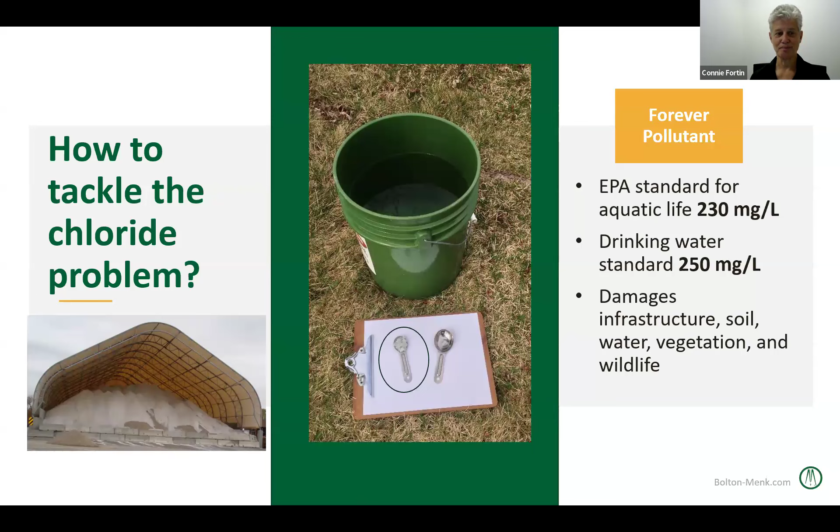If you have questions about the chloride pollution problem, we're well versed to answer that, but I'm going to assume you know about it. My background for 20, 25 years is I trained thousands of winter maintenance professionals, a lot of them in DuPage County, Lake County, Will County, Kane County, in your area. And as I trained these 20,000 or so winter maintenance professionals, they trained me.

They would often come to me after a class or during a class and complain about the way an intersection was designed, a parking lot, a ramp, stairs, bridge, you name it. They're like, it's not all our fault.

So two years ago, my company was acquired by Bolton and Menk, a civil engineering firm. And I realized I had the perfect opportunity to share all the stories I had learned from the winter maintenance professionals with the people that design all these salted surfaces.

And although I spent most of my career in the middle of this triangle, trying to drive down salt through more efficient winter maintenance, I realized we have a really big opportunity to reduce the need for salt right from the top. Because we don't apply salt because it's fun. We do it because our pavements aren't performing.

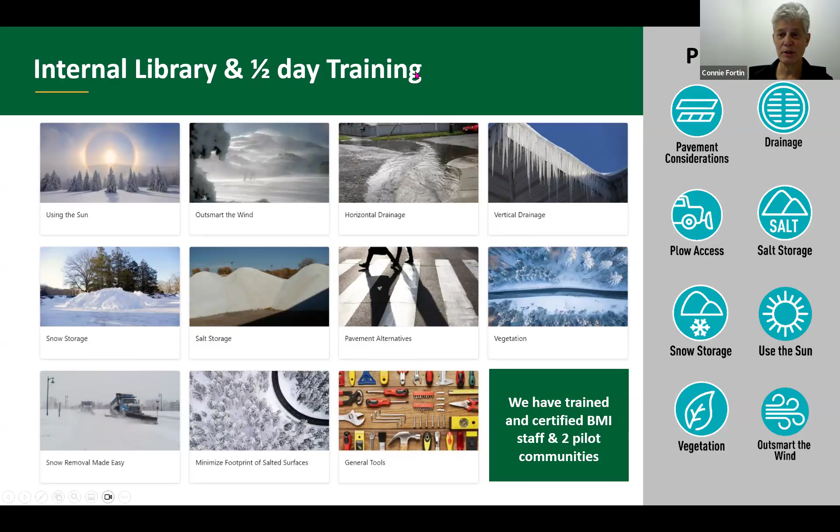In addition to creating an internal library with all sorts of things in there, I created a half-day training, similar to many of the training programs I've created for Minnesota or that I've taught in Illinois. We've brought most of our civil engineers, landscape architects, planners, and technicians through it internally, and we're starting to bring this out to some pilot communities.

So what are these things we're telling our engineers to think about? Winter. Here's an example. One of the things I want them to do is use the sun. It's free, nature is out there, let's put it to our advantage. In this easy graphic, you can see wherever we have a shaded surface in the winter, it doesn't perform as well. It's more icy, slippery, dangerous, requires more maintenance and more salt. So in something as easy as selecting the species of tree or the placement of tree, we can get much better pavement performance.

But yeah, if we think we need a real complicated solution, maybe we don't.

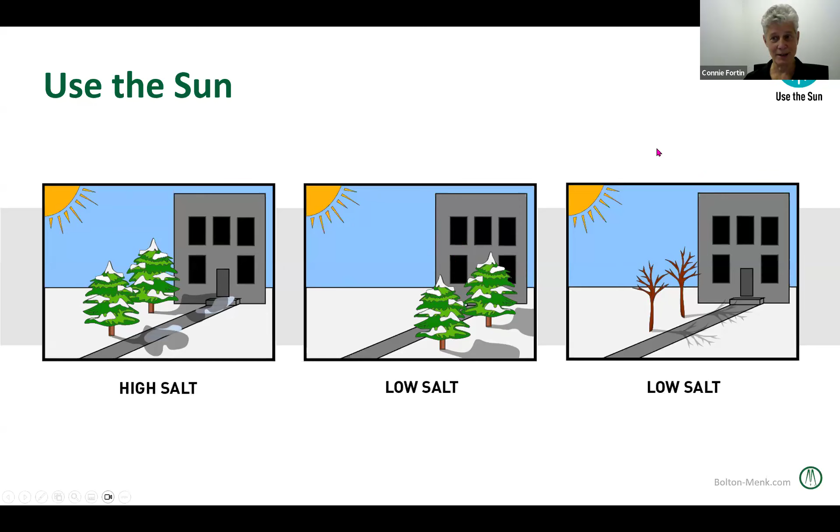That's pretty easy. We also ask them to outsmart the wind. In order to outsmart the wind, you first have to know the direction of the winter wind. This graphic shows you that it looks pretty consistent throughout your state, although there are some local, regional variations. So we put that in the CAD design platform now, the angle of the average winter wind in the community, so they can see it.

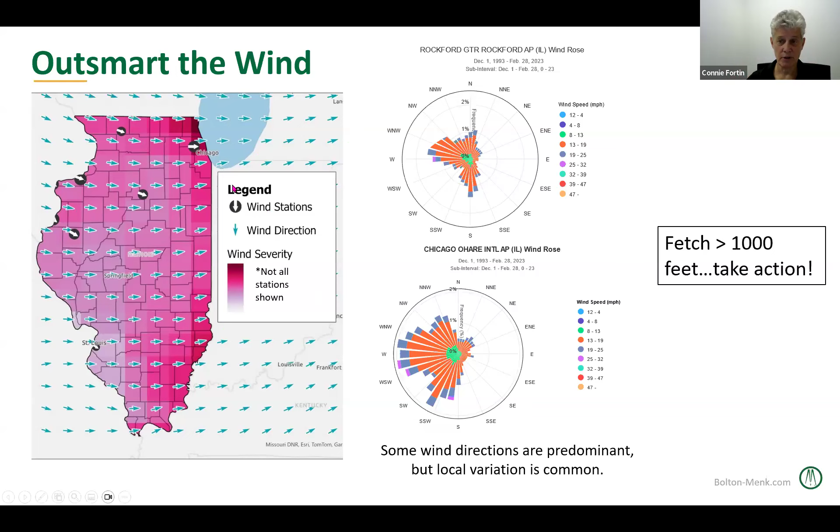That if you understand the different forces of nature, you can do something about it. Here's a couple things you can do about outsmarting the wind. Snow fence, that's pretty common. There's living snow fence, structural snow fence, there's even solar snow fences these days. The whole way a snow fence works is the wind hits the snow fence, that wind loses its energy, it can't hold the snow and it drops it on the other side, before it gets to our road or parking lot.

Now, what we sometimes forget is the wind doesn't know if it's an intentional snow fence or an accidental snow fence. So we put our bushes, our rose garden, our park bench on the windward side of our salted surface. And the wind hits it, it loses energy and it deposits the snow right on the sidewalk or right on our front steps.

So these unintentional snow fences, we can sometimes do something quite easy about. We can move the shrubs to the other side of the parking lot or the sidewalk or the park bench, or we can even just trim down the rose bushes before winter. So some basic things we can do to outsmart the wind.

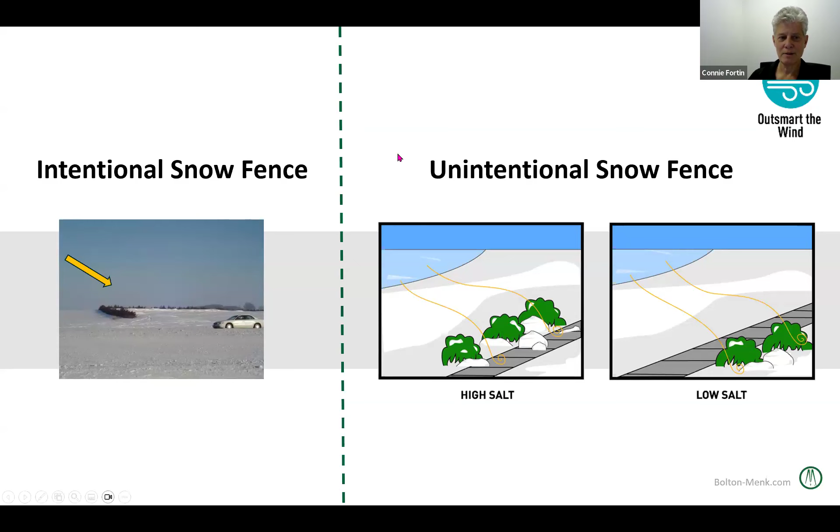This is, I think, the thing I like the best, if I could pick one of the things, and that is our meltwater sprawl. So our engineers design for rain. That was shocking to me when I realized that they don't design for snow. There's no requirements to design for snow. So the plow drivers have to clear the sidewalk, the parking lot, and the road. That's their job. In my opinion, the engineer's job is to not let it come back on those saltable surfaces. This is not acceptable to me, this picture, because this is going to create an ice rink overnight.

And we can engineer that problem away. We want to reduce the meltwater footprint. Write that down on a big piece of paper, put it on your door.

Here's why. In the Twin Cities, we get about 46 freeze-thaw cycles. Now, some of them have no snow on the ground, so of course we have no meltwater problem. And some are real brief cycles, not long enough to melt and move the snow. But let's say we have 20 or 30 of these during the winter. They all create things that we show in this top picture. Those are safety risks. Those are call outs to maintenance. Those are salt. But we can design those away.

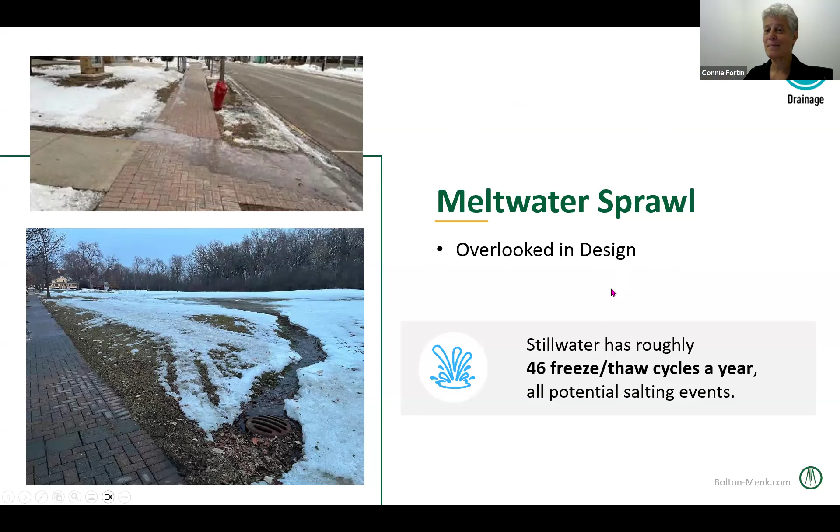Now, there are areas that are more prone to these problems than others. Super elevated surfaces are surfaces that are at a slant like this. The lower picture is a ramp. The snowy side is the uphill side. So you can see on this warm day, the snow melted and it moved across the ramp. You can also see a lot of salty residue. You can see tire tracks in the mud. The day I drove by, somebody had knocked over the signal light. It is very hard to keep this safe.

We can just see super elevated surfaces to be prone to meltwater sprawl and increased risk, winter risk, and salt.

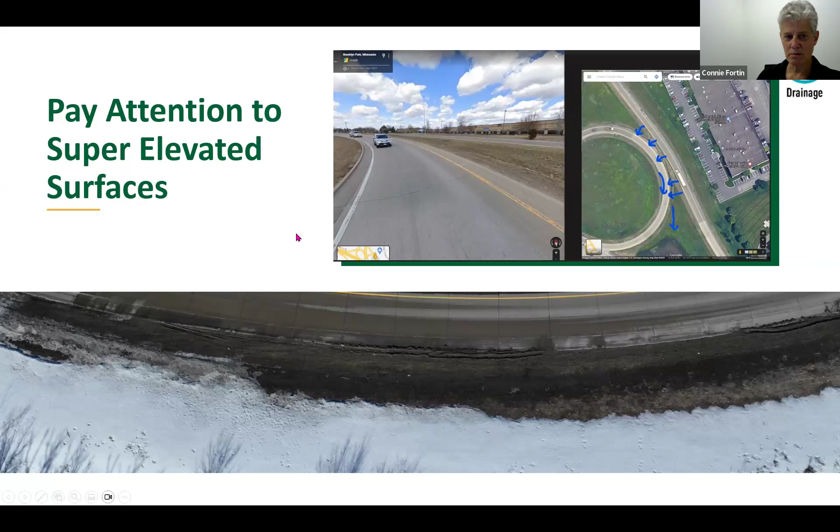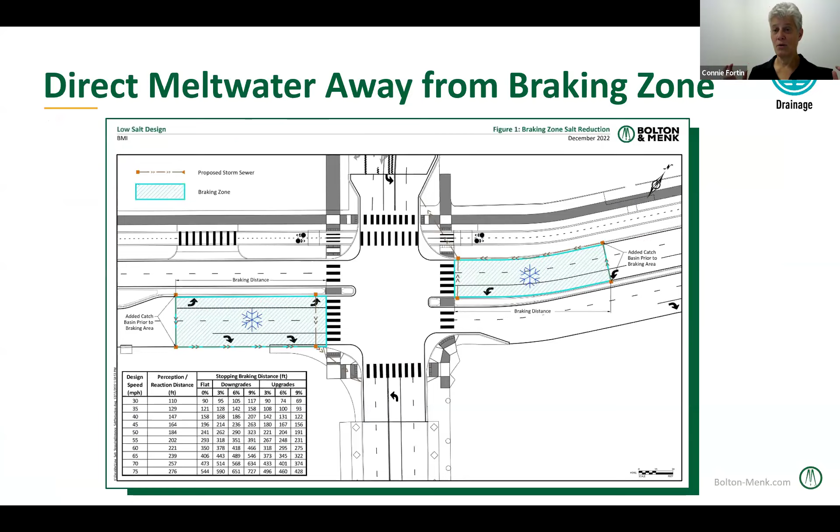We're also looking at braking zones as a critical area. We are not going to route our meltwater through the braking zone. So are you doing that in your plans? If so, you might want to consider it. The plow drivers know the safety risk areas, and that's what they salt the most. So braking zones is one of them. We don't want to route our meltwater through the braking zones.

Vertical drainage is something else. I better make sure I'm not talking too long here. Amy, keep me on track. I could talk forever on this.

So exciting. So what I mean by vertical drainage is this. The plow drivers plow the road, the parking lot, the steps, these things. But the snow lands on many other areas, on the roof, on the deck, on the awnings, on the lawn, raised median, parking lot islands. They never plow those. But the snow still melts. And when the snow melts from these surfaces, I do not want it to enter our saltable surface. So you have to pay attention to where the snow's landing and then control the meltwater. Do not let it go across the intersection or across the parking lot or across the sidewalk. That's a new way of thinking of things.

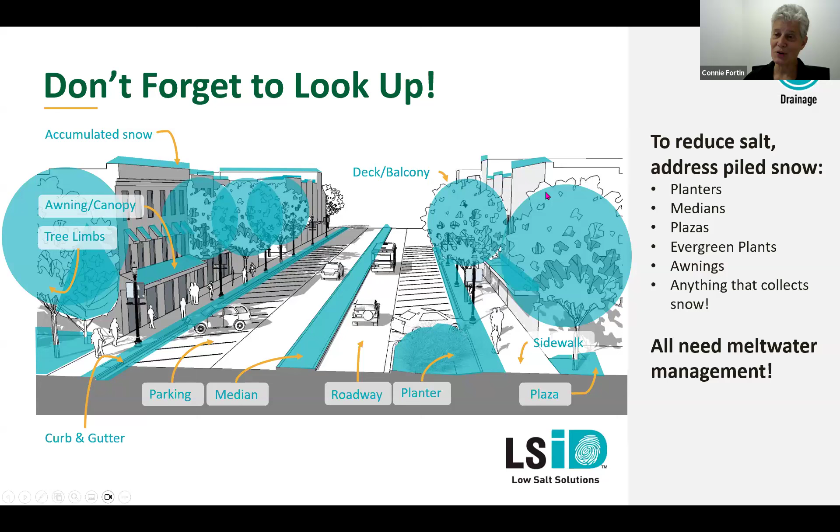So one of our engineers drew up this. All the stuff in blue is where the snow melts that we don't normally pay any attention to. But now in low salt design, we are paying attention to it, and it's creating a whole new way to look at our designs.

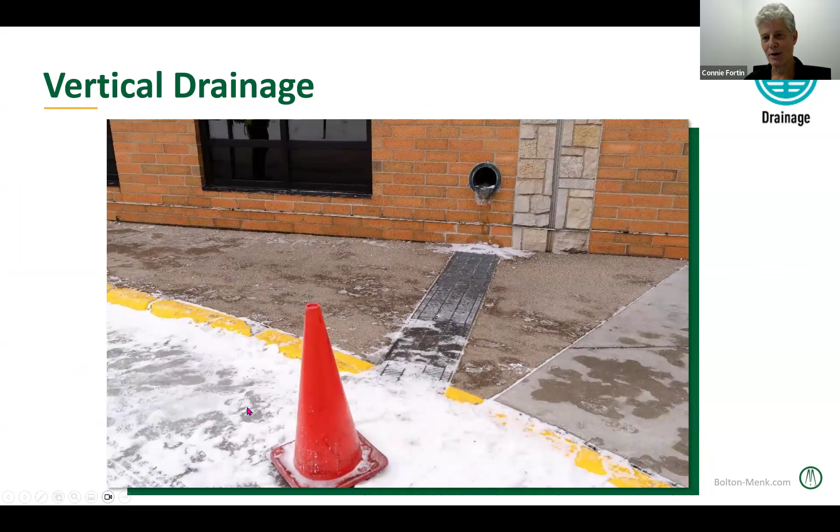This is another vertical drainage example. So the meltwater comes out, used to come out across the sidewalk. Apparently that was too dangerous, so they chiseled out their sidewalk, put in this kind of grate to make it safer on the sidewalk. But they just pushed the problem to the parking lot. So we're trying to fix a poor design, and it's always harder than designing it for winter to begin with.

How about if we made it easy to plow? If we make it easy for snow removal to be successful, they will do a better job. If we make an obstacle course for the plow drivers, they can't remove the snow. They'll do the best they can, but nobody's jumping out of the truck with their shovel to get all these weird nooks and crannies that we put in.

So look at your designs. Imagine if you were driving a plow truck. How are you going to clear the snow out of here? Do not make an obstacle course.

Same for your sidewalks. Don't put the mailbox and the light pole and the park bench and the planter box all spread out over the sidewalk. Group them so the UTV with the blade can plow around them. Just pretend you were in that vehicle. Anybody here who's plowed snow is probably going, yes, absolutely.

Now, parking lot islands. Do me a favor. The next day or so, go out and observe the parking lot islands around you. How many of them are green and beautiful like they were designed? They might have had thought about flowers and trees and all this great stuff.

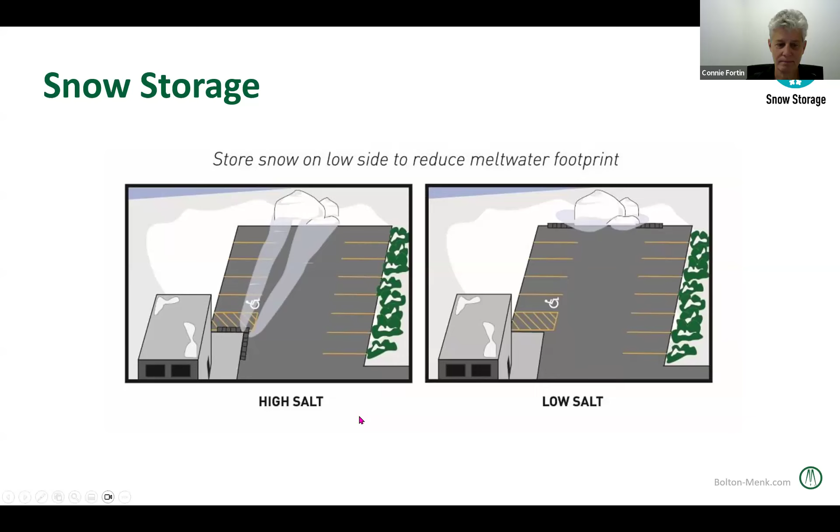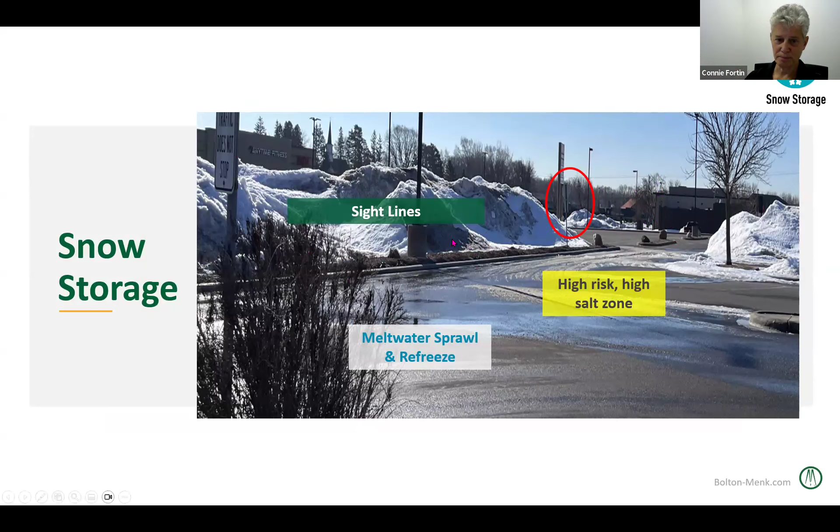We launched this initiative 2 years ago, and I've spoken at a lot of events, and I've been asked many times, do we have a manual? So I sat down over Christmas break and I wrote the low salt design primer, the ABCs of low salt design. It's going through internal technical review here. Then it will go through some kind of company standards formatting before it's released. So I'm optimistic by halfway through the year, this will be available.

I don't know if it'll be for sale or for free or how we're going to do it. But the other thing that I also wrote is the snow garden guide, because I'm sick of rain gardens and I'm sick of parking lot islands. We need to think about a 4-season solution, and our 3-season thinking causes all of these things that we design to be destroyed by our winter use. So what if we designed a snow garden instead of a rain garden? How would the design features look different, and how would it perform for us? So I'm hoping also that this will be out middle of the year. And that's been a lot of fun.

As we're testing our ideas, we have pilot cities now in the Twin Cities. We have 5 of them where we're bringing them through our training. We're looking at problem sites in the winter, their policy, their plan review checklist, their parking lot design standards, whatever they want to do, along with our new winter thoughts. Together we're learning a new path forward.

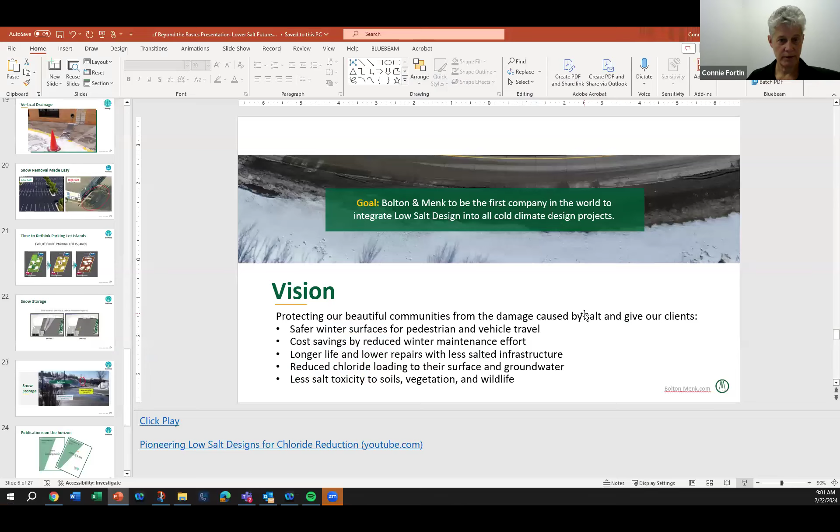This is a video. I don't want it to play. Shoot, I guess I'm gonna have to. This is a video on YouTube. I think it'll probably be in your chat, that if you want to watch us talk about an example of going through low salt design in a little movie, it's there for you. You can do that.

So with that, I'll turn it back to the audience and to our chat to ask me questions about low salt design, about use the sun, outsmart the wind, vertical drainage, horizontal drainage, snow storage, snow gardens. There's a lot of fun things that we can do to design for winter.

Thank you so much, Connie. I have to say, I'm a former architect, and a lot of what you just said really resonated with me. You plan to keep water off a building, and you want to make sure that the structure is designed to hold the snow weight. But where exactly it drains, these are really, really good points.

I know we have some interesting questions in the chat. David was wondering, you talked about the parking lots and the islands, but he was curious about chlorides and their accumulation in permeable pavements and permeable parking lots. And if they do accumulate within them, are they releasing chlorides over a longer period of time? And what are the management strategies for folks who are using permeable pavements in parking lots?

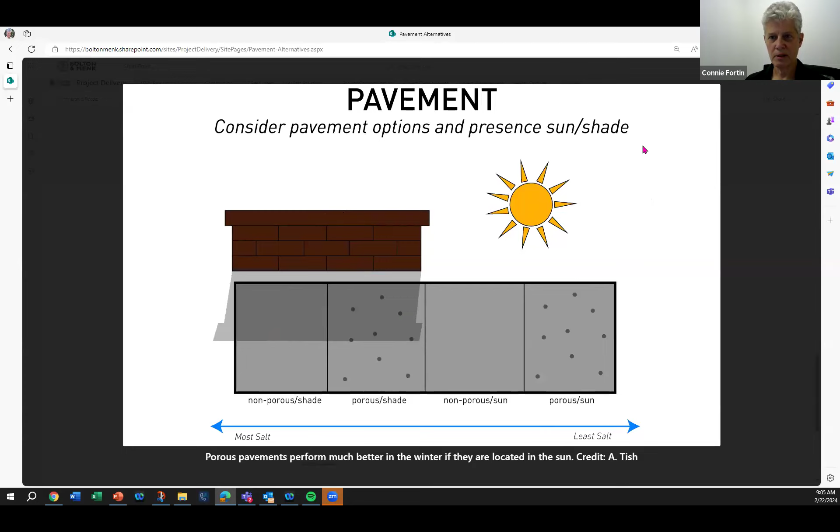Also, my opinion of pavement alternatives as far as design -- and I know design considers a lot of different things -- but I've worked with a lot of plow drivers and they're afraid of the alternative pavements, like what kind of cutting edge, could I salt it, should I salt it, what am I gonna do about it? And also the designers are afraid of it too. We don't really know, it's more work, it's a little mysterious.

So what I say in design, and you guys can prove me wrong, is let's use the real easy things: use the sun, outsmart the wind, control that meltwater sprawl. And if we get into a tough situation, like an ambulance bay on the north side of the building where the wind is blowing and it's shaded and the gutter is draining right down onto it, it's a really good time to use alternative pavement. Let's go look at those heated pavements. Maybe not for the whole 494 interstate, but when we've got a tough winter problem to solve, it's a really good time to use them. Then it's not so scary and it's really smart.

So that's kind of not answering our person's question, but it's just a little of my insight anyhow.

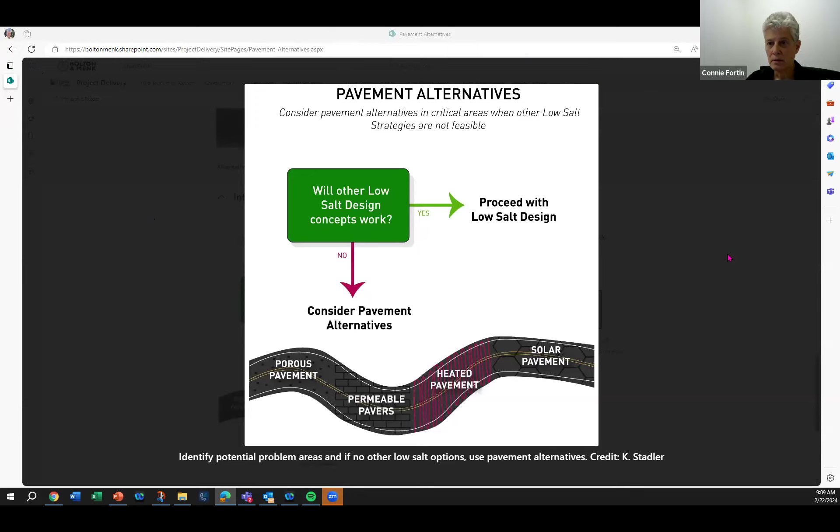So while you're working on that, our final question was talking about deciduous trees, and if you would recommend planting those on the south side of a parking lot so the sun can reach it in the winter, but then they can shade cars in the summer. So strategic siting of specific types of trees.

Yeah, so the deciduous trees are brilliant because we can reduce that heat island, right? But we don't have to have the winter penalty of that shade in the winter. So I think that's good. I know some people are going to say, well, we've got the leaf litter and the phosphorus loading and stuff, we've got to make sure we're not creating that problem too. And there isn't a perfect world.

But I do think that if we did the analysis of planting trees in islands, does that really work? Or how much shade and where should we plant them, and how do we create this ecosystem that can survive and allow winter performance? We're going to come up with some brand new looks at design. I think our cities are going to change what they've been traditionally doing.

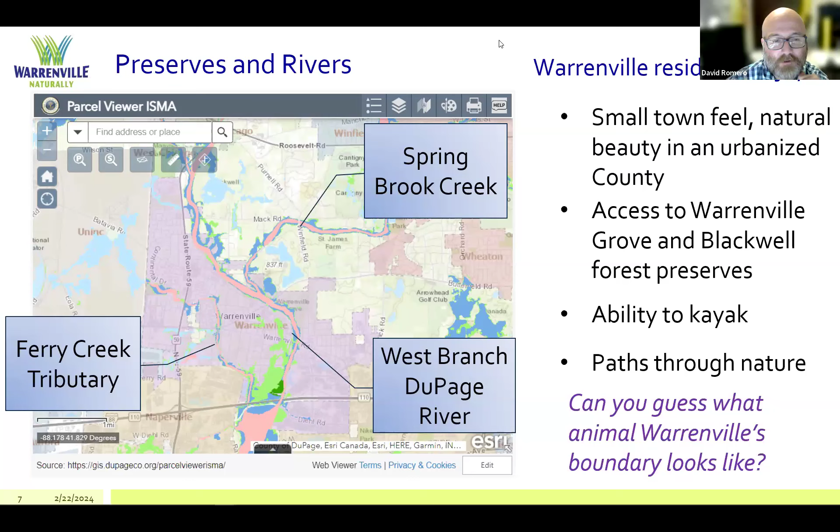One fun fact is I'm originally from Michigan, and for those familiar with Michiganders, a lot of times we use our hand as a form of explaining Michigan geography. So when I first started working at Warrenville, one of the things I looked at was trying to get a sense of the boundaries of Warrenville, and what it looked like to me. I felt like it looked like a particular animal—I don't know if it looks like that to you, but I felt like it looked like a miniature schnauzer. So maybe you have something now to refer to as Warrenville. Not that we're a miniature schnauzer, but it's something fun to consider.

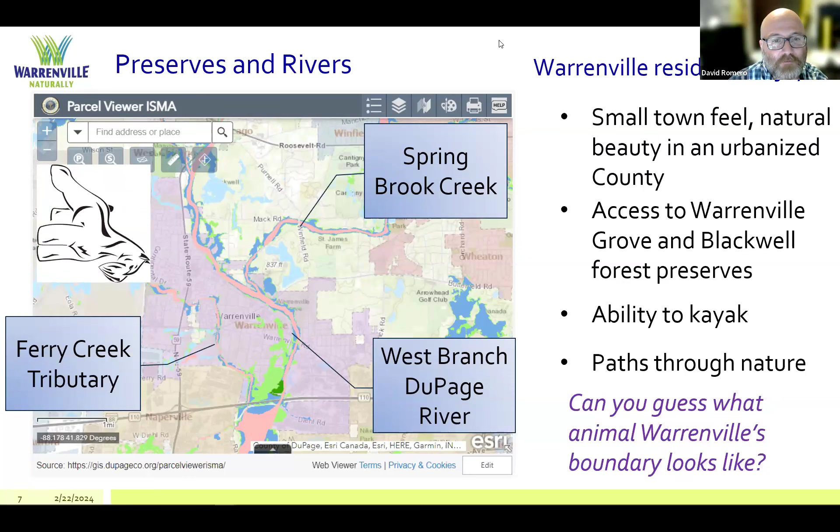Going back to our desire and care for a small town and our appreciation for natural beauty, we started a Natural Areas Commission around 1986. They helped oversee public areas. I heard from our former mayor, Vivian Lund, that there was actually a time where the city had its own greenhouse and grew and maintained trees. Apparently she also gave away free seedlings to people who gave birth in the city as a kind of welcome.

Shortly in around the early 2000s, I think 2007, the commission changed to the Environmental Advisory Commission. And with that, the roles and responsibilities were also a little better documented. So currently, one of the main things is to educate the public about environmental issues.

They also oversee our Arbor Day event. We have actually been a Tree City USA recipient since 1987 and have received that recognition annually since, with the exception of 2 years. So it's something that as a city we're proud of.

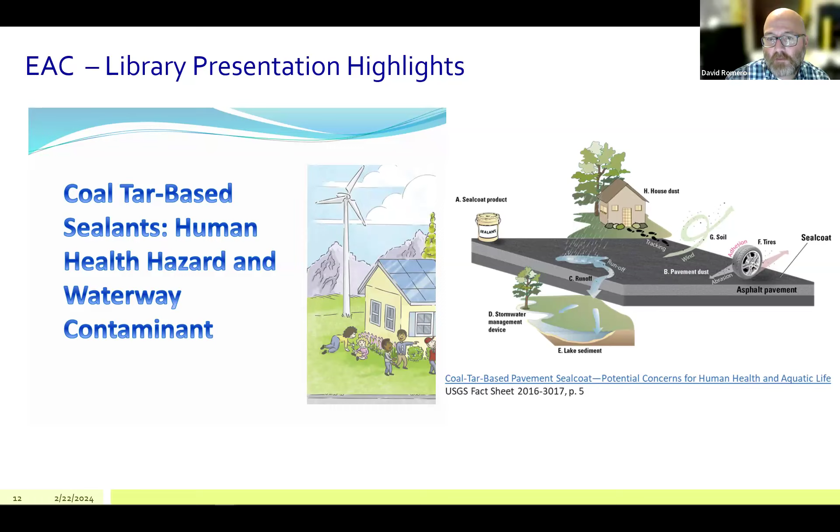It's a hazard that, as you can see in the picture on the right-hand side, starts off with the asphalt getting abraded by tire tracks. It creates dust, which can be carried by wind onto soils or tracked into our shoes and into our home. Rainwater can take it into our storm sewer system, and then it goes directly into our rivers and streams.

The byproduct of coal tar is PAHs, polycyclic aromatic hydrocarbons. They're formed by the incomplete burning of coal, oil, basically organic substances. Even grilling or charring your food produces some level. The main concern is the level of concentration of PAHs in coal tar, which is considerably higher than in asphalt.

The primary exposure levels are: you can inhale the dust, have skin contact, or ingestion. It also tends to have a higher effect on children, as they're more susceptible to its effects.

This, as I stated before, is not only hazardous to humans, but also to aquatic animals. It's really toxic. PAHs are pervasive, they're a sediment, and they don't dissolve.

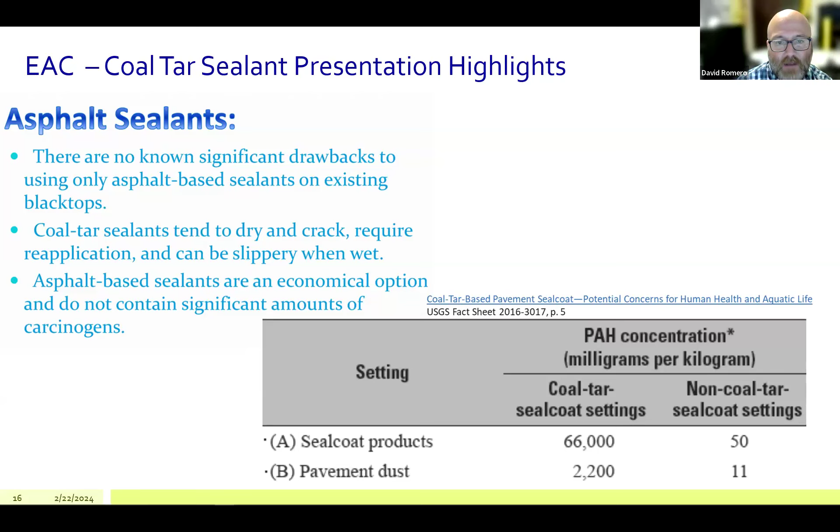There are alternatives out there, such as asphalt, some oils, acrylics. You don't have to go with asphalt as your type of pavement choice, but if you are sealing an asphalt parking lot or driveway, an asphalt emulsion is a better route than coal tar.

One question a lot of people have is, well, what's the cost difference? This is an example from Seal Master, a popular seal coat company out there. On the right-hand side you can see the price difference between coal tar and asphalt — asphalt now is actually cheaper.

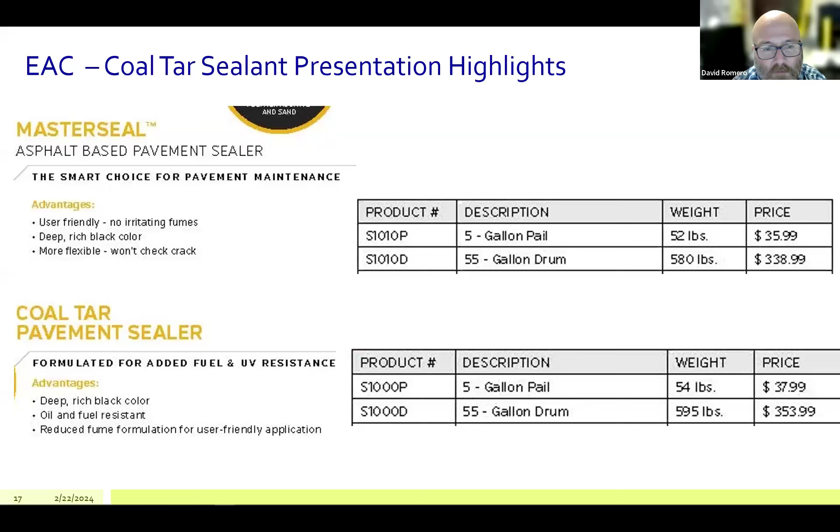It provides better flexibility and supposedly doesn't crack as much. Granted, there is the argument that coal tar might be a little better at oil and fuel resistance, but is it really the payoff for the hazard that it causes to both workers, children who might be playing on it, and the environment?

I place this on here as a reference for you. I imagine our presentation will be dispersed to you. If you want more supporting data, there's a ton of it done over the years by the USGS, Agency for Toxic Substances and Disease Registry, EPA, and other scientific journals. If you're looking for local advice, I wouldn't necessarily come to me — I'm a civil engineer and only have a beginner to intermediate level understanding of water and sediment quality — but you can reach out to staff at DuPage County or the DuPage River Salt Creek Work Group.

I imagine people at the Conservation Foundation might be able to help you too. And of course, you can come to us if you want to find out more about our process and how to implement a coal tar ban.

So at this point, I'm going to pass off the presentation to our other presenter, Christine Hocking.

Thanks, David. So as David was mentioning, the EAC had this library presentation in 2012, in May and April. So what really happened after that point? With that motivation from the library session, they made a presentation at the Cantera Owners Association.

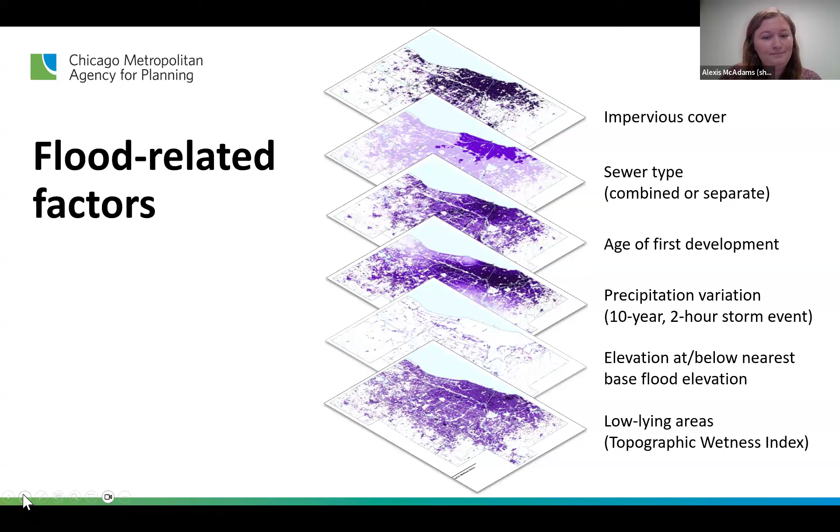Combining those ingredients, we decided to go with a method known as the frequency ratio approach. This method analyzes the relationship between those recorded flood events and each of the flood-related factors individually. Then once we can quantify and put a number in that relationship, we can combine them together to create a summarized index.

This is a really great method to use when we have partial data. By that, I mean we have a lot of data on where floods happen, but we know it's not complete. There are places that flood that aren't recorded or reported, or just don't make it into the data sets that we have access to.

However, this method still gives us a way to estimate flood susceptibility for those places, even though we don't have a fully complete set of data. This is also a pretty useful method for areas that we know are susceptible to flood, but we just haven't recorded floods recently in our time of study, though there is a possibility of flooding in the future.

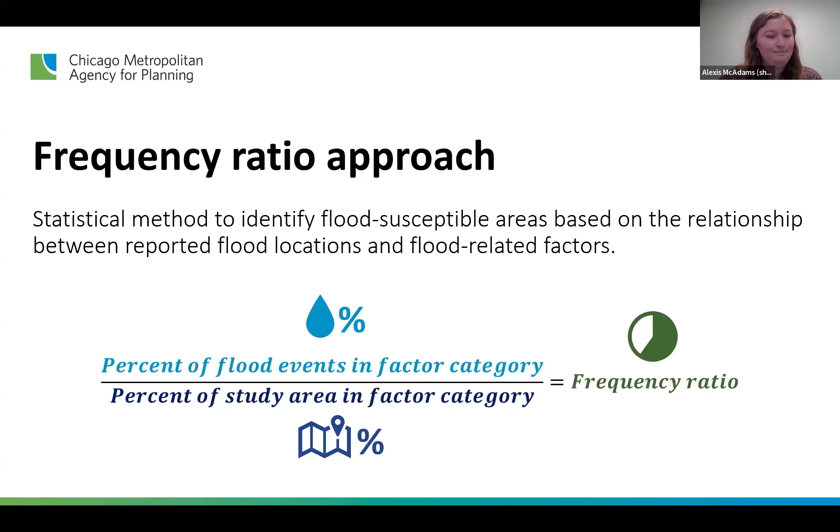So this approach is a little easier to understand with an example.

Across northeastern Illinois, about 15.8% of the region is covered by a combined sewer system. However, when we look at our flood locations data, we notice that about 27.4% of all flooding events are happening in these combined sewer areas. Since this is a higher percentage, combined sewer areas are seeing more than their fair share of flooding compared to the rest of the region.

So this is an example of producing a frequency ratio for just one of our flood factors. We repeat this process for all of the flood factor information we collect. Sometimes we divide those flood factors into categories or percentiles of equal size, and then we add up all the frequency ratios and normalize them on a 1 to 10 scale to produce our index.

So finally, we have some brief results of this analysis, and to summarize it extremely briefly, I don't want us to be here too long.

We saw the highest frequency ratios for areas with combined sewer service areas, areas where impervious coverage is between 35 to 70%, areas that tend to get more rain, very shocking I know, and areas that were developed prior to 1974, or estimated to be developed prior to 1974. Of course, areas that match all of these traits would see extremely high combined index scores.

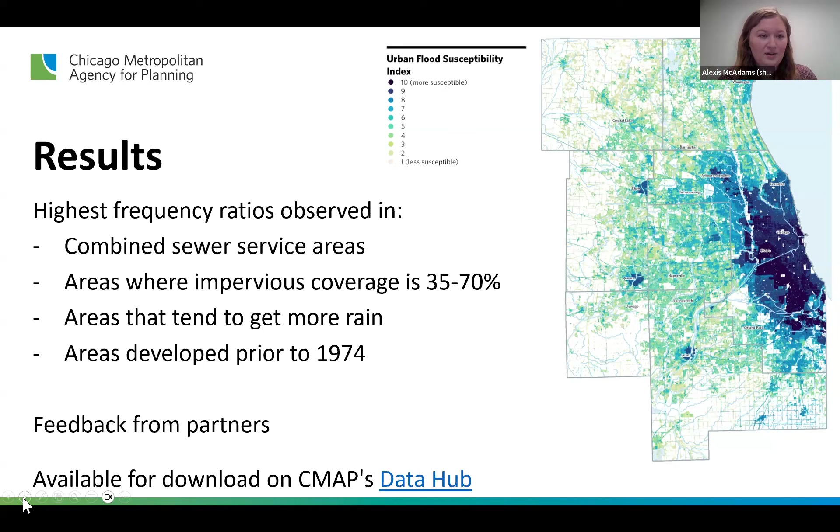The results are available now on CMAP's Data Hub for download and analysis if you'd like to check this out yourself. We also include a fuller methodology appendix document with more detail about the frequency ratios, the data we used, and the flooding events data. So if you're interested in more details, please check it out.

There are a few different ways that CMAP and our partners are using the index. It's used as a preliminary screening tool for hazard identification, such as in the Cook County Hazard Mitigation Plan, or HMP. Here at CMAP, we use it to help identify areas for stormwater planning assistance, and other agencies in our area are doing the same thing.

It's also been used to prioritize and select mitigation and resilience projects based on need, in combination with other data and analysis that CMAP produces.

Finally, we were excited to be able to share the assembled flood factor data for other researchers and analysts, and you can see that on our data hub. But unfortunately, we're unable to do the same with the flood event location data, due to privacy restrictions associated with this data, trying to protect identifiable information for properties that experience flooding.

So as I mentioned earlier, CMAP continues to hear about the value of this tool, which we're very excited about. We're currently undergoing an effort to update it. This update is supported by congressionally directed spending, also known as an earmark, that we received in September of 2022.

We're looking at improving this tool in 3 major areas. First is updating our input data, which includes adding additional flood location information, as well as looking at new flood-related factors beyond just those 6 we initially chose. Next, we're also reviewing our analysis method, the frequency ratio approach, and taking another look at the geographic extent of our indexes. Is separating the indexes into a riverine and an urban version still what we want to do going forward? Finally, we'll be improving access to the data by producing web-based mapping tools to make it easier for people to view, explore, and reanalyze the index for smaller local areas.

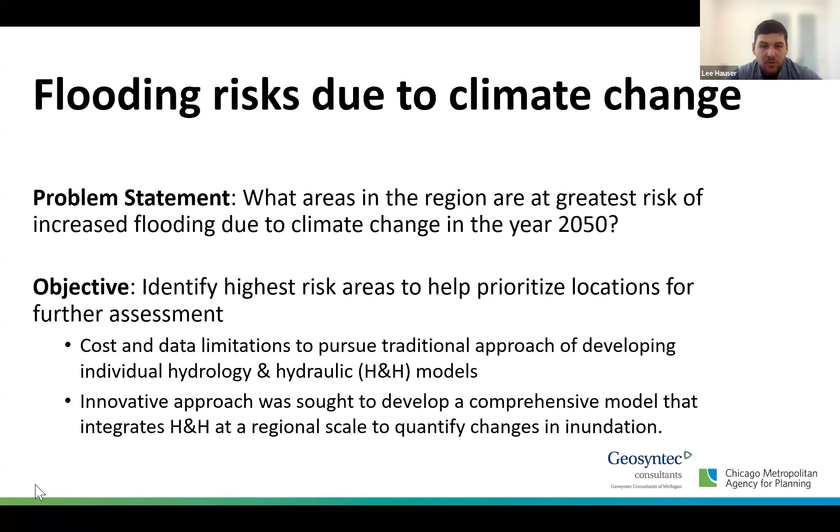We decided to use HEC-RAS 2D with the rain on grid analysis because it can integrate both hydrology and hydraulics into a single model. This approach uses high-resolution LiDAR topography to directly represent the underlying terrain to perform the hydraulic computations while accounting for spatial variability in the rainfall across the landscape.

As I mentioned earlier, it follows a lot of the technical effort CMAP did with the FSI, but applies a dynamic hydrology component. The rain on grid analysis provides a seamless transfer of precipitation to calculate runoff and perform the hydraulic computations to map the flood inundation.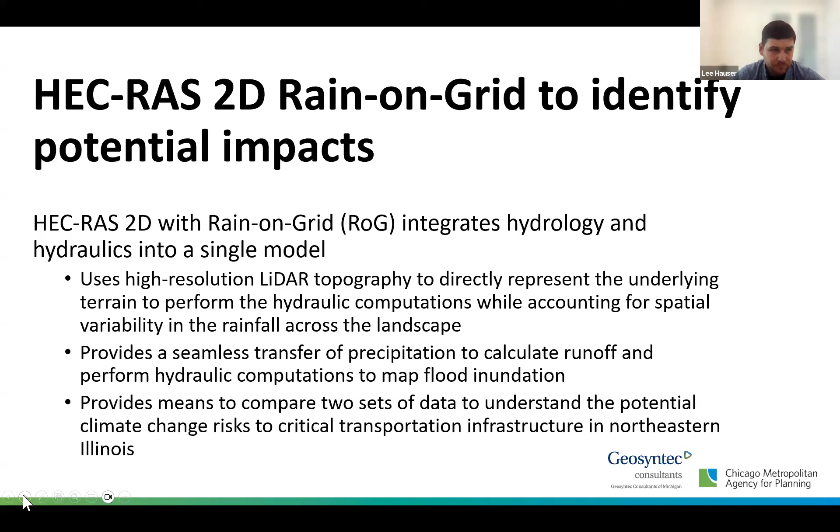Being able to do this in a single model provides a means to compare two data sets to understand the potential climate change risks to critical transportation infrastructure in northeastern Illinois and being able to compare those rainfall events.

As I mentioned earlier, the traditional approach for climate resiliency planning in the urban environment relies on both H&H models to estimate flooding impacts. There are multiple software programs that can look at this, but they can either be very costly or need extensive amounts of data inputs related to storm sewers.

HEC-RAS is a free program developed by the U.S. Army Corps and has always been the industry standard for modeling hydraulics within the riverine system. This focuses on using flow hydrographs to simulate flows through the riverine corridors.

The U.S. Army Corps has continued to release newer software versions of HEC-RAS that build on its modeling capabilities. A significant advancement came when it added capabilities for 2D modeling, and most recently, the ability for spatial infiltration capabilities for those 2D areas, which improved the model's capabilities for simulating runoff flows across the terrain when a precipitation hydrograph is applied.

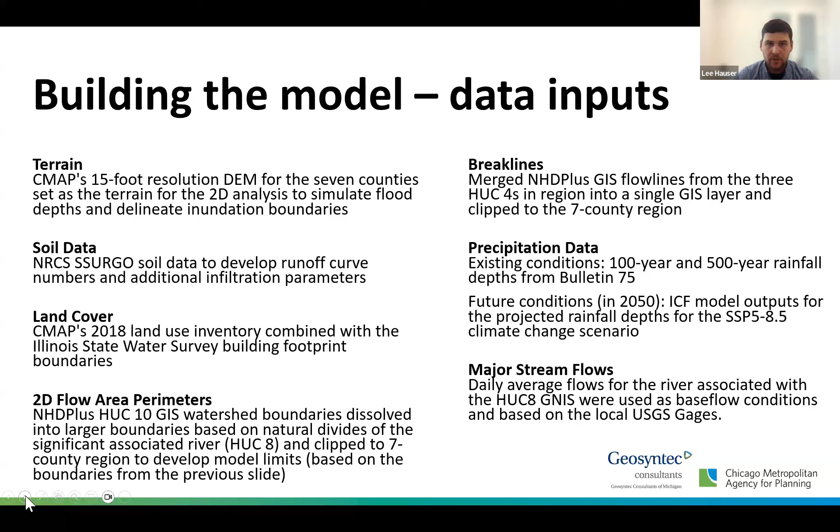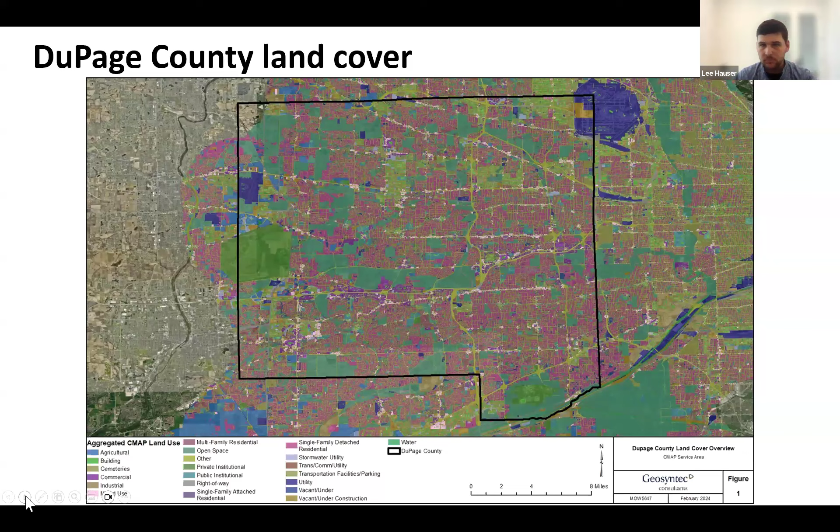During larger storm events, this stormwater will move across the urban and rural landscape after sewer system capacities are exceeded, and ultimately get into the riverine systems based on terrain—providing that initial understanding of which areas are at higher risk for flooding, related both to transportation networks and critical community infrastructure.

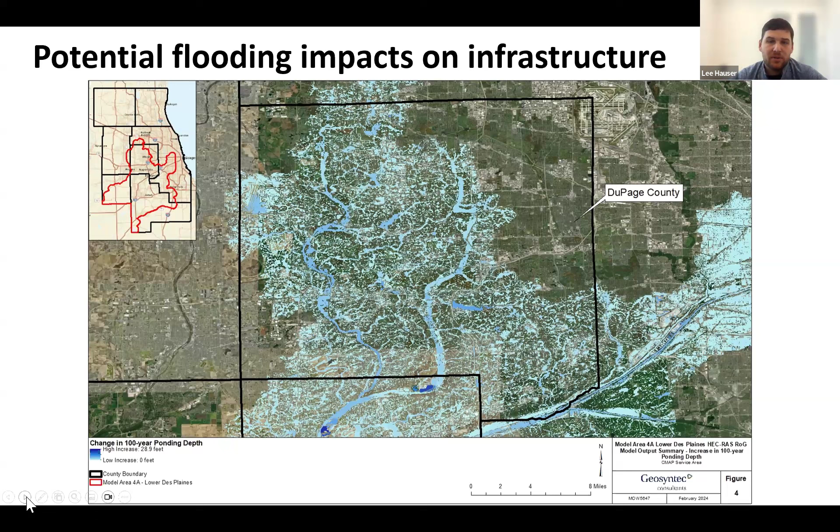Data sets and maps like these are intended to help CMAP's regional planners understand areas at higher risk of increased flooding due to climate change, being able to work with stakeholders to understand which transportation networks could be most significantly impacted by extreme weather, and to prioritize locations for assessing flood risk in greater detail and identifying opportunities to make the regional transportation network more resilient to climate change.

It is important to acknowledge that this GIS inundation data produced as part of this analysis should only be used for intended planning purposes. This data is not intended to support detailed analysis, such as sizing potential stormwater improvements at specific locations, redefining mapped FEMA floodplain boundaries, or adjusting insurance policies.

Some limitations and constraints with the modeling effort include: the DEM used was not hydraulically corrected, therefore the streams were not burned into the DEM. The waterways in Cook County and the surrounding Chicagoland area are complex and have hydraulic structures such as bridges and culverts that were not modeled within the riverine system.

The modeling analysis did not include existing separate or combined sewer infrastructure. Therefore, the results are based on terrain and do not consider these conveyance features intended to manage stormwater runoff. Also, there were isolated instances across the modeling area where sudden transitions from larger 2D mesh cell sizes to smaller sizes caused higher than expected water depths. These results impacted small pixels throughout the area, and the impacts were negligible when trying to understand which areas are at higher risk of increased flooding.

As mentioned earlier, the HUCs were clipped to the CMAP boundary. They don't include flows from other streams in the model area, and the flows did not change for the 100 and 500-year events. However, it's worth acknowledging that many of these elements could be minimized as part of future model refinements as more detailed analysis occurs throughout the CMAP region.

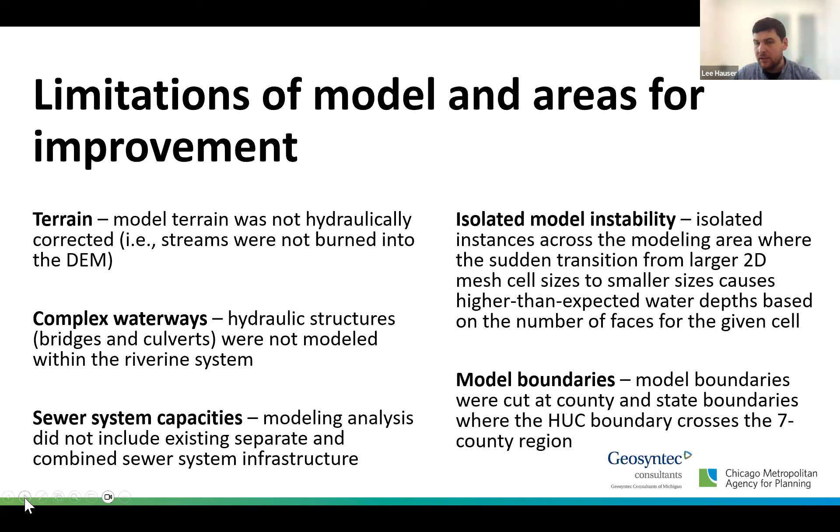And with that, I will pass it back off to Kate.

We're excited to have this analysis incorporated into our transportation resilience plan, but we're also interested to find other ways for CMAP and partners to use it in their work to really account for future impacts from climate change.

The last resource I want to highlight moves beyond considering where flooding is likely to happen and focuses on who is impacted and how we can make investments that help those people who have been underserved and stand to benefit the most.

This soon to be released guide compiles strategies and best practices for integrating equity into flood resilience investments specifically. But I just want to point out that the practices apply for stormwater investments more broadly, and hopefully to a lot of you attending this conference today.

It's written for engineers and planners and provides case study examples for how governments and other organizations are advancing equity in their work. The guide was supported by the same earmark funding as the Flood Susceptibility Index update, and we also tapped into some MacArthur Foundation funds to, very importantly, compensate 5 community-based organizations for their time and expertise given to the guide.

Working with those community partners, we developed 5 key principles that the group found essential for advancing equitable outcomes in flood resilience investments, and quite frankly, for many investments more broadly. They are: centering community voices in decision-making, intentional trust building among government and non-government partners and community organizations and members, prioritizing investments to the areas that need it the most, building out and considering holistic solutions that address the many needs communities face, and long-term planning to make sure that what we put in the ground can actually sustain over time.

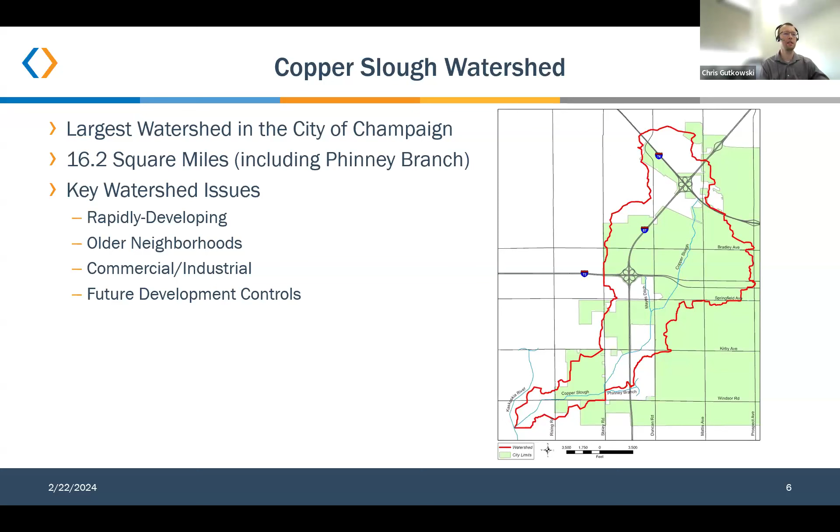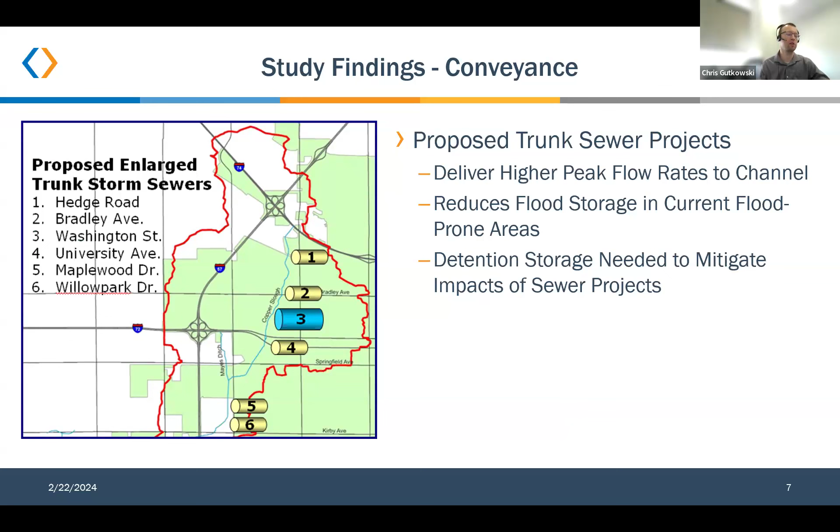Some study findings contained in that 2007 report included several stormwater conveyance improvements, which took the form of larger trunk storm sewers. I've highlighted number 3 here as the West Washington Street project, which I'll talk about in great detail. And then pipe 1 is the Hedge Road, or what's been now termed the Garden Hills project. I'll touch on those two projects since those are the first two that have been implemented.

For the West Washington project, you can see here the existing sewer in black was a 36-inch pipe that served the neighborhood, jumped up to a 54, and in our Copper Slough watershed master plan, we were talking about replacing that with a 72, 48-inch, or 84-inch pipe. So that was an extremely large jump in conveyance that would have occurred.

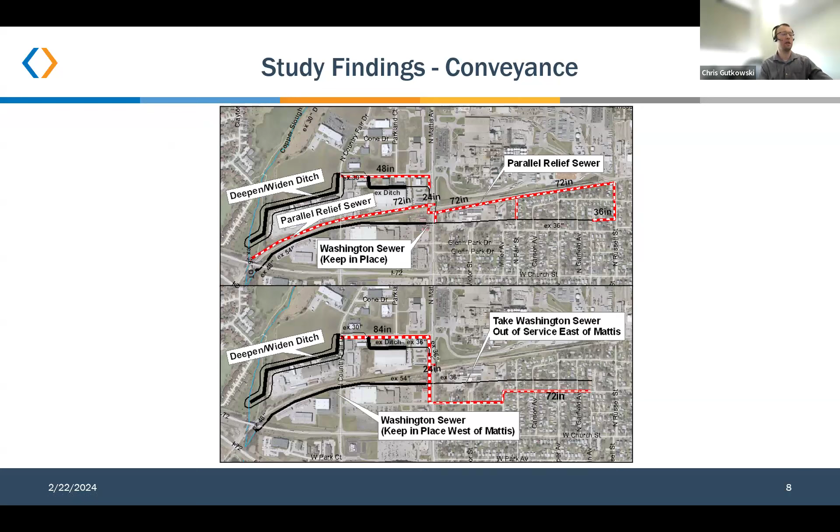Because of that, you're obviously just going to be moving the problem elsewhere. So to offset that, we looked at several detention options, which took the form of large regional detention basins that would utilize open area along the channel where we could bring multiple sewers in and mitigate the impacts of the flows. You can kind of see what we were trying to do—just manipulate that hydrograph in the main channel.

Ultimately, the Copper Slough Watershed Master Plan was a high-level overview. We weren't looking at specific neighborhoods—it was more of, okay, what's going to impact the Copper Slough and how do we make that situation better? Specifically for the West Washington neighborhood, we were looking at somewhere in the range of $15 million in 2007 dollars. And like I said before, we had large sewers, big regional detention ponds, and even some improvements to the Copper Slough itself, just to make that work.

Obviously with these kinds of recommendations, you can't just put in the sewers and expect results, or put in the detention pond and get results. It's not one size fits all—everything needs to get put in place in order to even realize some benefit. And so that was where we began our journey.

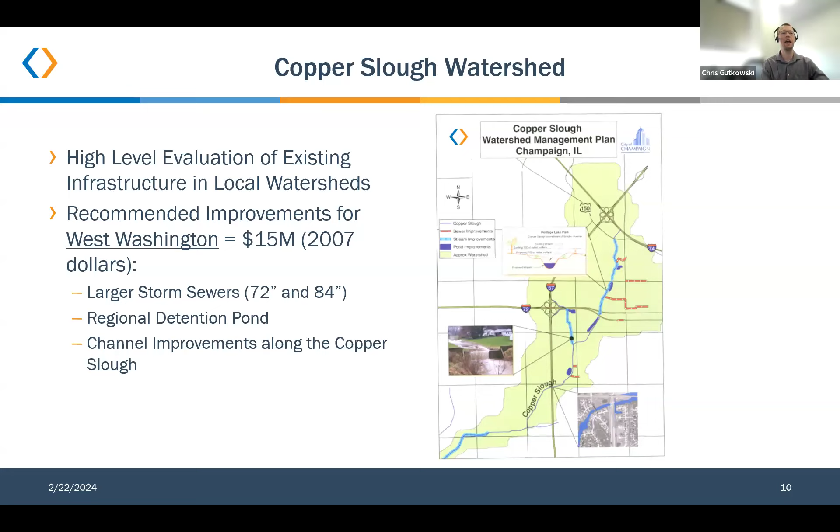Soon after this was completed, there was something that kind of changed everything—what I've termed the Battle of the Basins. Here I have shown two stormwater detention basins: on the upper left is the Healey Street basin, and the bottom right is the 2nd Street Basin. These basins are actually outside of the Copper Slough watershed, but this is really where that battle took place to change the city's way of thinking. Generally, one of these basins is considered a success, and the other is considered less successful, I'll say. And the engineer in me, if I had to choose which one I would consider a success, I'm originally going to say, okay, I need more information to make that decision.

But if I was forced to make a decision, looking at that bottom right picture, I don't normally design my detention basins with light poles in them. So if I was forced to, I'd probably say that basin. But the public perception doesn't judge the functionality of a detention basin on these conditions.

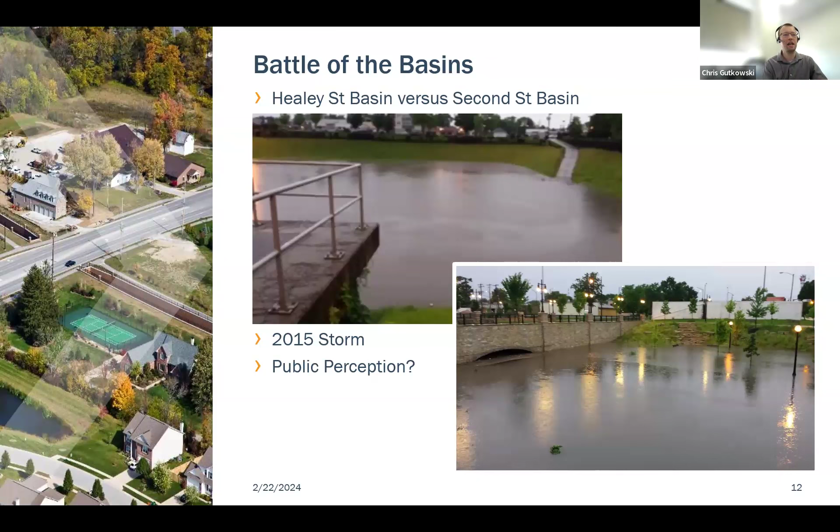And so the engineer in me still can't make a decision on which one. But if you put your perspective in from the public, okay, that 90% of the time where the basin isn't in use for stormwater purposes, now you can kind of see, okay, it's fairly obvious that the 2nd Street Basin here on the bottom right is going to be far superior than the Healey Street Basin.

And if you're familiar with the Champaign, Urbana, or U of I campus area, you'll realize over the last 10 years or so, Campus Town has gone through a complete change. They're growing skyscrapers, it seems like, overnight along Green Street. And the reason is because the infrastructure from these two basins, they're only a couple of blocks apart, but these two basins, along with some other infrastructure that isn't visible, has completely transformed the floodplain along and through campus.

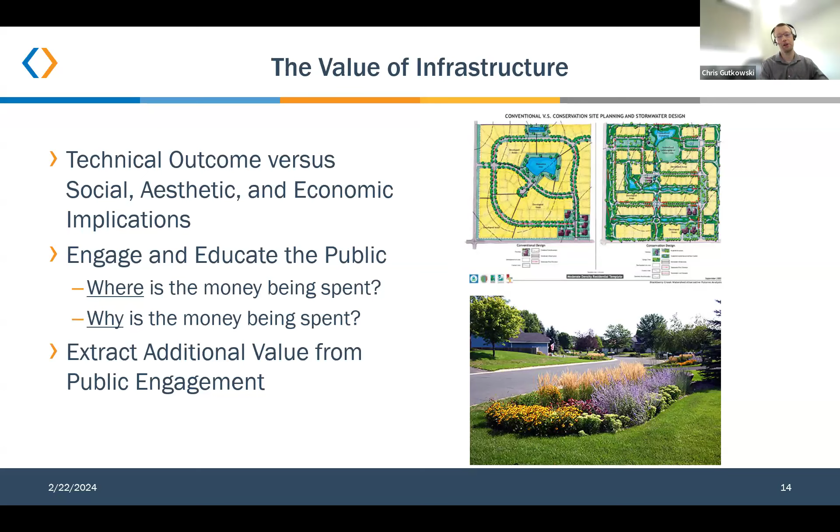And the other aspect is extracting additional value from that public engagement. So I'll touch on that briefly with some of our projects where the public is involved very early on, typically earlier than we normally have. And there are some challenges associated with that.

So moving on to the West Washington Street project in particular, this was the first project for the Copper Slough that occurred after that Battle of the Basins. And you can kind of see how we changed our direction once we altered the scale of our project, but also our expectations of the final deliverable.

So here, this is just a brief overview of the West Washington watershed. It's 408 acres. I said before, it's 36-inch drain tile. If you zoom in, you're not going to find a single detention pond in this area. Just for reference, if you're familiar, this is the Kraft manufacturing facility. I'll use that for reference in future slides as well. So that gives you a perspective. Interstate 57 is just off to the west here, and 74 is to the north.

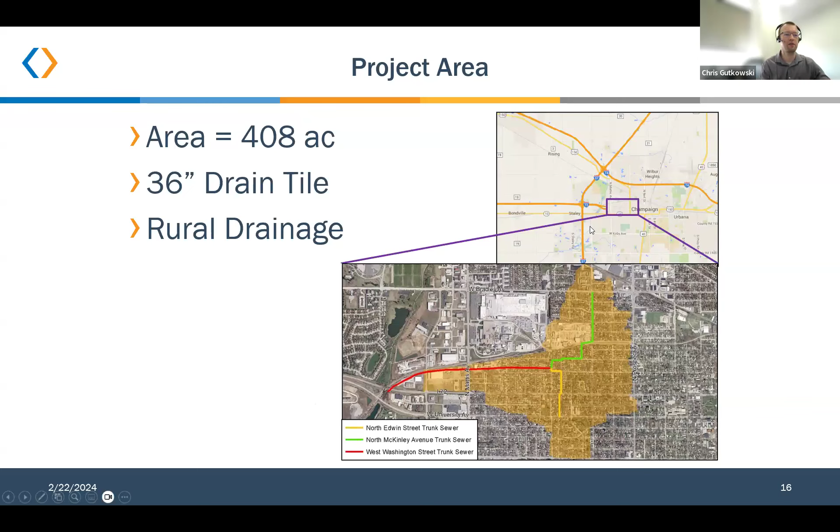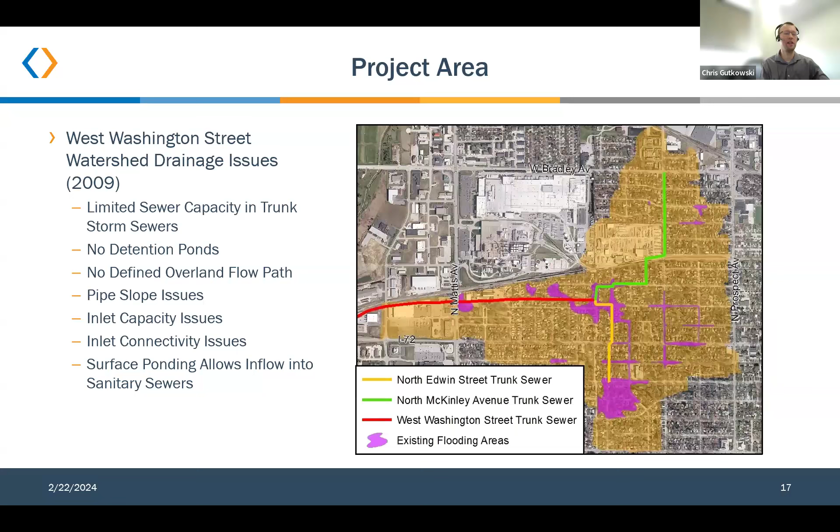So the project area, like I said, there's no detention ponds. What's shown here in this pinkish purple is essentially what's providing stormwater detention. There's no way for it to flow over Mattis Avenue and out to the Copper Slough. It's all trapped, and has to be drained by that 36-inch pipe. So there's a lot of challenges facing this fully developed but older neighborhood on the west side of Champaign.

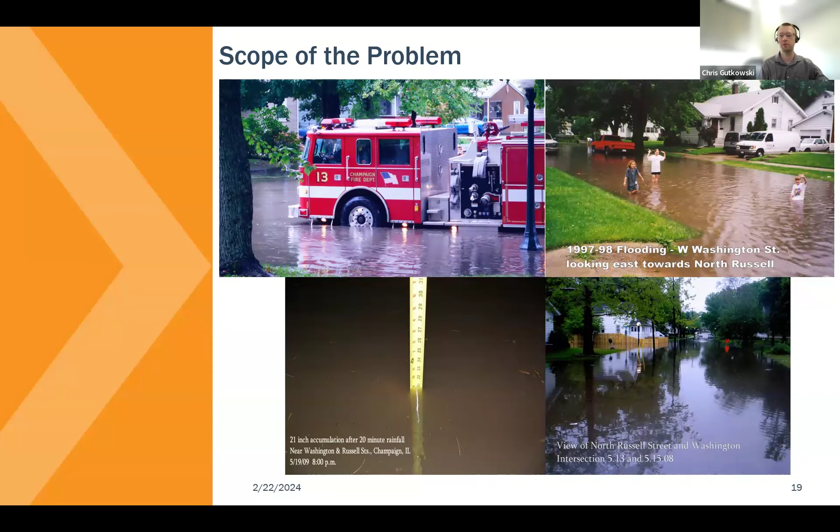In a lot of ways, this is one of the top priorities of the city of Champaign, which is why it was selected as the first project the city moved forward with. Some of the goals we were looking at were the problem areas, but ultimately the city was looking at implementing something closer to what the Second Street Basin provided, while not wanting to spend $15 million of 2007 dollars on a big pipe just pushing flow somewhere else. So they were looking at something they could implement in a phased approach.

At the same time, the city had started to form what were called steering committees. These were organized resident groups popping up all throughout the city. If you had a problem area that was severe enough, typically a steering committee was being formed, and there were several of these formed throughout the city at this time. We met with that committee on a regular basis to get initial feedback. We met with council members, city staff, and even had residential public meetings that took place.

I will say the steering committee, some of the pros are you get that local perspective you don't necessarily see. I mean, yes, I lived in Champaign-Urbana for close to 20 years, but before this project, it's not like I was familiar with this neighborhood and what they had to offer. So you got that personal touch to the project early on.

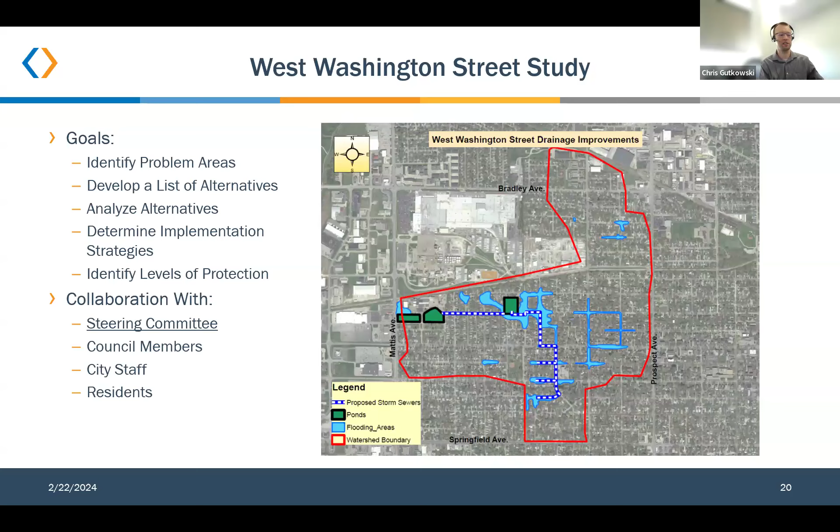The challenges were bringing them on at the conceptual level of the project. There was a certain expectation that, okay, I'm meeting with the city and the engineer this year, start construction, maybe next year I'll have my problem solved in year 2 or 3, and that's just not the case. There's definitely a process that has to take place in order to construct these types of projects, so setting those expectations to be more realistic was one of the challenges when you bring in the residents that early in the process.

So the study findings for the West Washington found that we needed about 40 acre-feet of storage, and obviously if we're able to locate that stormwater retention closer to the problem area, we're able to more efficiently store that runoff. We don't have to convey it as far, so there are benefits to that.

What we have shown here in green and the surrounding area was the phase 1 preservation pond area, and shown in blue, the piping that connects the two pond areas was phase 2 of the project, and then the upstream collection system was phase 3. I'll just step through each of those briefly to show what we ended up with, which you can see is vastly different than a 72-inch pipe and a big regional detention pond.

So for the preservation pond, here we had an area tucked into the existing neighborhood, very close to the ground zero area of the problem. We were able to place 11 acre-feet of stormwater retention at this location and do some minor reconstruction of the surrounding area. That cost was right around $2 million plus land acquisition, and it was built and completed in 2015.

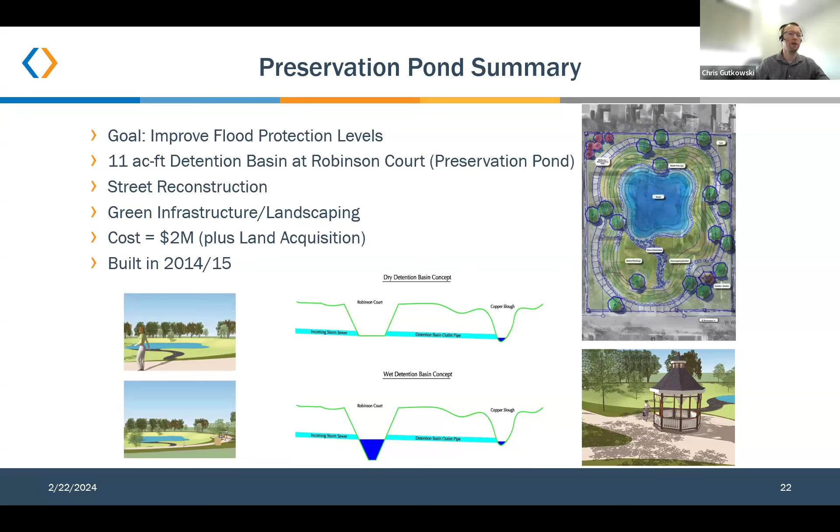So some of the challenges with this project, we had that aesthetic versus volume question, and this was really the first question we had to have answered, just because, as you saw with those pictures, there was a lot of flooding occurring, but they weren't interested in having another Healy Street Basin in their backyards or in their neighborhood. While the Healy Street Basin was kind of tucked away and isn't very visible, it's not something you want in your backyard. So that was something we had to consider.

The land acquisition, the land use in this plot of land was different than the surrounding areas, and it being where water was naturally collecting, it kind of made sense that this was the area that had to be the first point of impact for this project.

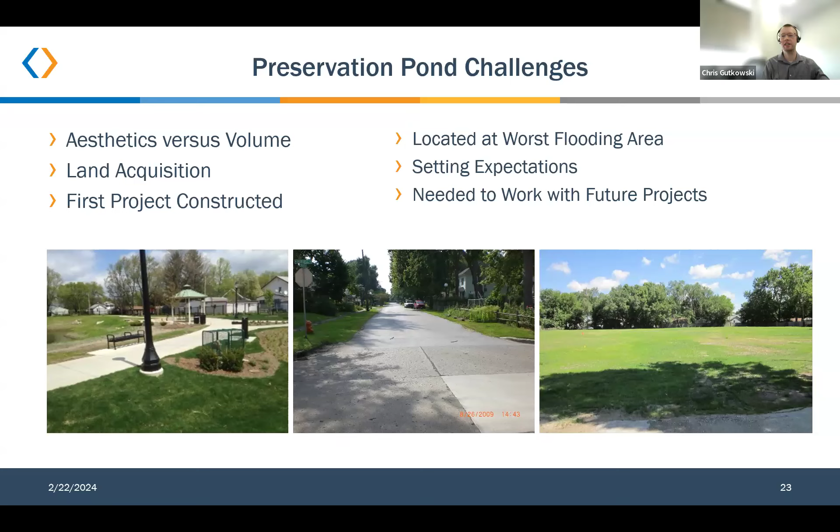Some other challenges were to make sure it works with future phases, and to set expectations. Second Street Basin was close to Campus Town, right between Campus Town and downtown Champaign, so it's a highly visible area. This one was not as visible. So we needed to make sure we're achieving that look and feel of Second Street Basin, but being mindful of what the surrounding neighborhood could really take.

So looking at phase 2 of the project, the Glenn Park project, as with every project, you have your unique site constraints and things like that. We were able to achieve 17 acre-feet of stormwater retention. This is a nice overview of the site. We have existing residential to the south and east of this project area, and an existing park here.

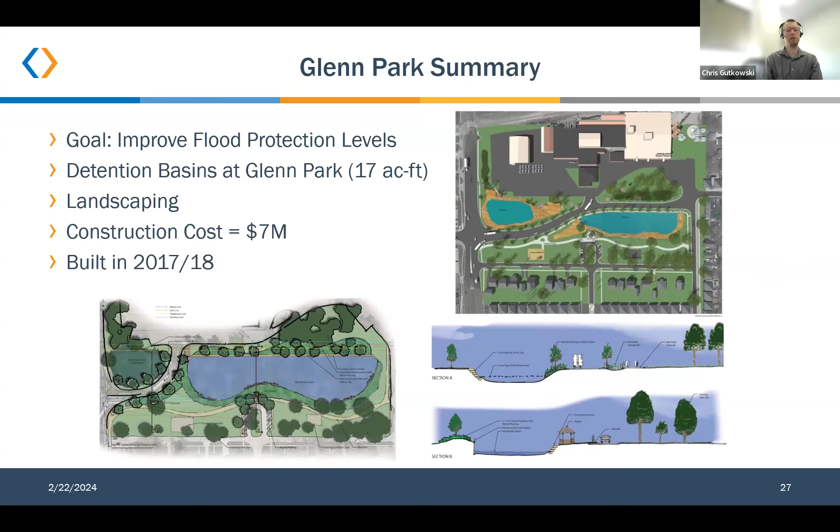That project cost about $7 million and was completed in 2018. Again, some of the challenges: we were again battling aesthetic versus volume, and I'll touch on that on the next slide. Stakeholder coordination, bringing in that industrial facility into the discussion, was unique to this project area. But at the same time, we were still having meetings with the steering committee, the local residents, and the park district to make sure we were all on board with what was ultimately going to take place, and continuing that evolution of the project.

If you can imagine, if we kept this 4-to-1, 5-to-1 slope that we established on the south side and continued that on the north side, we would probably lose at least a third of our surface area of our detention basin, not to mention all the volume that goes along with it. So this is one of the areas where the city determined we need to maximize the volume, and the trade-off was to install this large retaining wall.

This goes the full depth, so the water below the surface goes another 10 to 12 feet down. You can imagine that this wall is 25, 30 feet tall. It was a massive wall, but provided some aesthetic benefits as well as some technical outcome benefits.

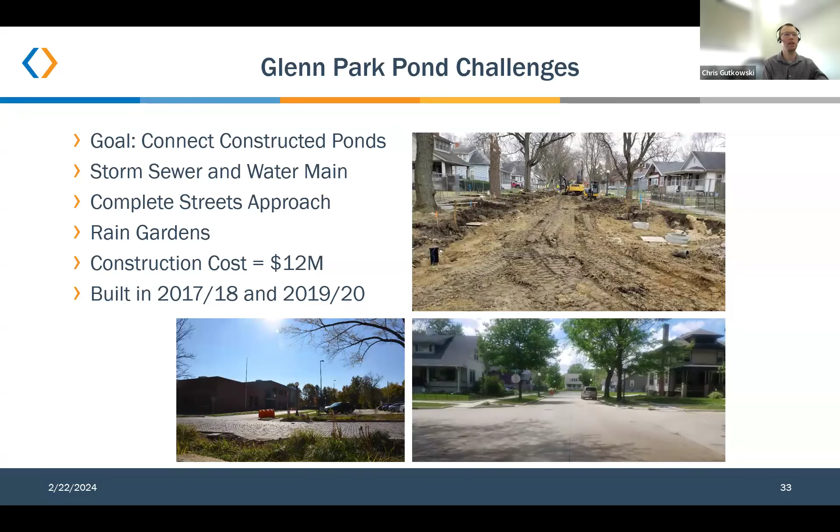For phase 3, there's not a lot of great pictures, so I only have a single slide. It's just some pipe in the ground. You build the stormwater retention, you've got to get the runoff there, so we reached a little bit further upstream to convey that flow into those ponds. Those projects were completed in 2020 at a cost of roughly $12 million.

The Copper Slough Watershed Master Plan, I would probably say, didn't have a great solution. The solution presented was doing some grading along the Copper Slough to lower the invert of the waterway in order to better outlet that neighborhood with a larger diameter pipe. There really wasn't a lot of opportunity for stormwater detention, so it was quite challenging to try and get something.

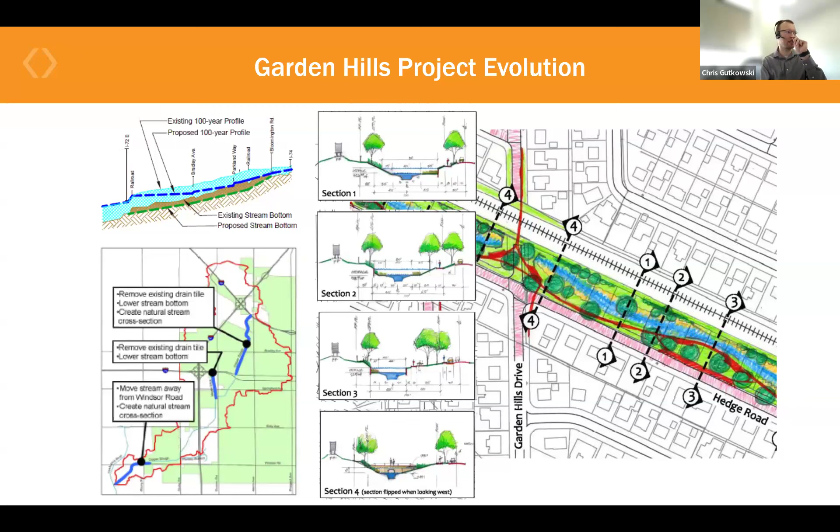There were some challenges with that approach. You can see some of the problem area pictures we had, dating back a number of years. This is a brand new renovated elementary school that was essentially inaccessible from the north because of frequent flooding, so that was a problem.

We were having the same discussions about aesthetics versus technical outcome. The Bulletin 75 rainfall was a big challenge, because the Copper Slough Watershed Master Plan, and even that local study, was done under the old rainfall data. When we came in to do the detailed design using Bulletin 75 rainfall, we found that the recommendations in that previous study were no longer going to work the same way.

That was one of the big hard-stop moments early in the design—along with railroad coordination and maintaining expectations. The West Washington project's first phase had been implemented for a number of years, and Glen Park was more visible more recently. More and more neighborhoods were telling the city, 'I see what you did in West Washington—when are you going to come to my neighborhood and do the same thing?' So there was a certain level of expectation that came with those developments that we had to satisfy.

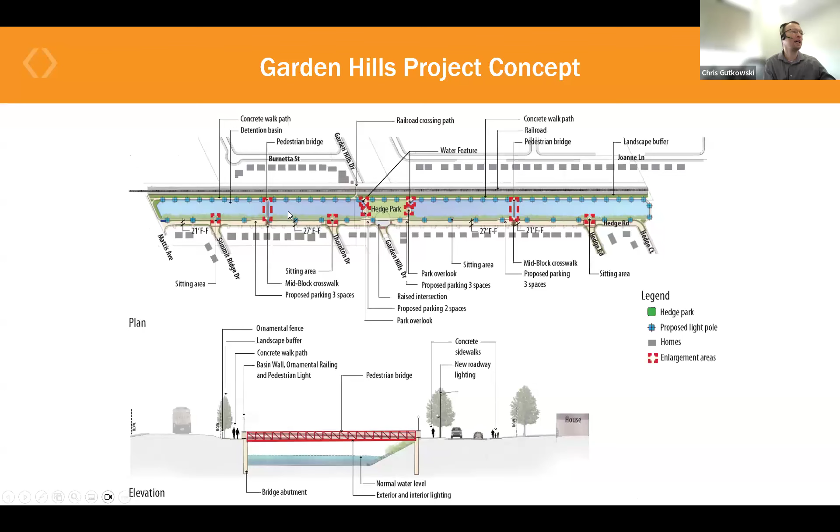We have a park-like setting that I can show in some early concepts on the next slide. We talked about things like waterfalls and other features, but based on site constraints, those were going to be challenging to fit in. What we do have, as you'll see in this next concept art, is another retaining wall—this one more challenging because it's sandwiched right up against the railroad right of way.

So it changed our design a little bit. But again, we had the same kind of issues where if we went with the same 4-to-1, 5-to-1 side slopes, we were going to eat up at least half of our surface, and we were going to have just a meandering channel. That's all we'd be able to achieve.

And so putting that wall in gave us a significant amount of volume. We were able to get close to 50 acre-feet of storage in these two basins.

You can see here, the central park is going to become a nice gathering place. We'll be able to focus residents into this area. We'll have a gated resident and pedestrian crossing of the railroad associated with this park, so it'll bring the residents to this designated and safer crossing for the elementary school.

Hey Chris, we're at time. Do you have a couple more slides, or how much time do you have? I only have one more slide.

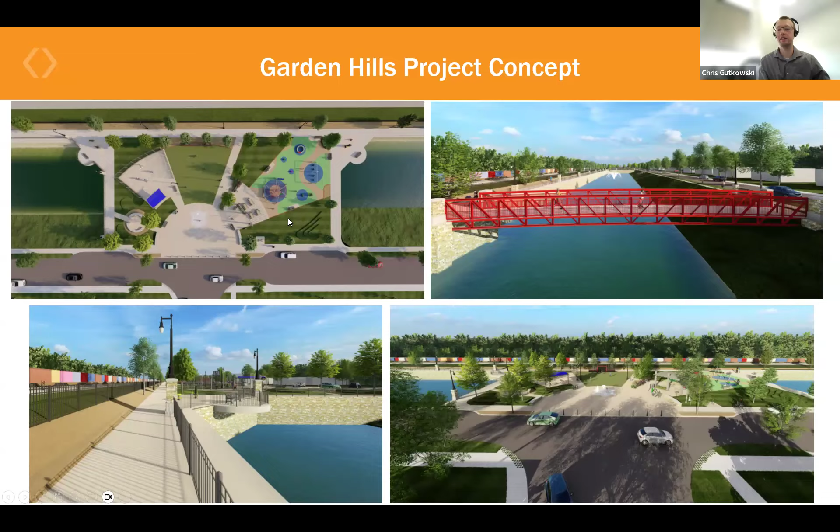So the next steps are to continue that 20 to 30-year cycle, continue those stormwater amenities, utilize that stormwater utility fee to build out this kind of approach to other neighborhoods, continue with the Garden Hills neighborhood, and target some of those other neighborhoods throughout the Copper Slough that are next on the list for stormwater infrastructure. So with that, if there's time for any questions.

All right, well, thank you so much. We're going to stay on time. So there are a couple questions in the Q&A. Chris, if you would mind answering those just by texting them in there. And maybe if there's time at the end, if you want to stick around, we can ask some questions live at that point. Sure. But thank you so much for sharing that.

And last but not least, we're going to talk about adaptive planting and management, the Gray Willows Wetland Mitigation Project. I work for the Conservation Foundation, so I'm very excited to see pretty pictures of plants.

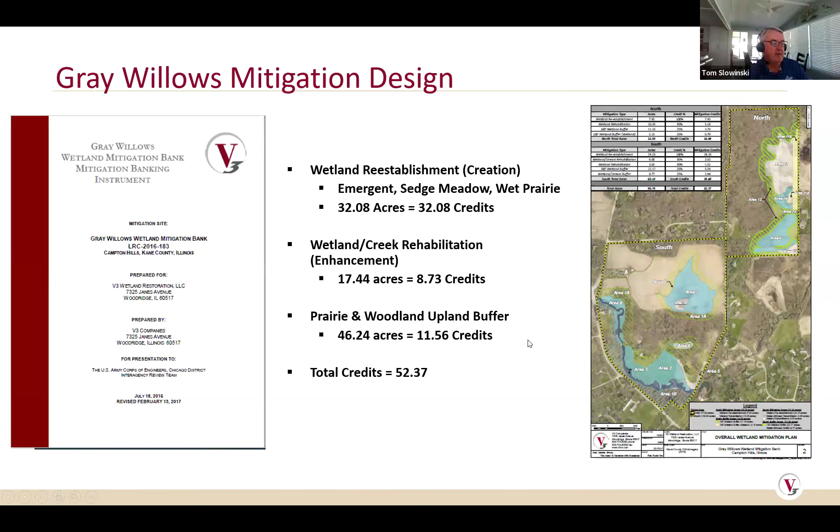Area 7, the central area, was kind of just a depressional ag field. And then we did some creation to the north, but we're mainly focusing on area 11 there.

So implementation summary. We started pre-seeding weed control and construction in 2018. I'll go over some of those details. We did dormant seeding in the fall of 2018 and 2019.

We installed a lot of emergent sedge meadow wet prairie plant plugs in 2019. We had very good hydrology due to a nice wet spring in 2019, which resulted in our first credit release.

Interim veg standards, we met those in 2020, the second year. And based on our adaptive management and adaptive planting, we met all wetland creation reestablishment areas in year 3. And it was important to maintain those in the 4th and 5th year, which we did, and met all final performance standards last year.

These are mostly vegetative performance standards, which are set by the regulatory agencies, mainly the Corps of Engineers. Although there are other benefits from mitigation banking from both a water quality and a stormwater management perspective.

We need to have less than 5% non-native species cover in each plant community, which is the hardest one to meet. We need 18 native perennial species at a 10% frequency or greater.

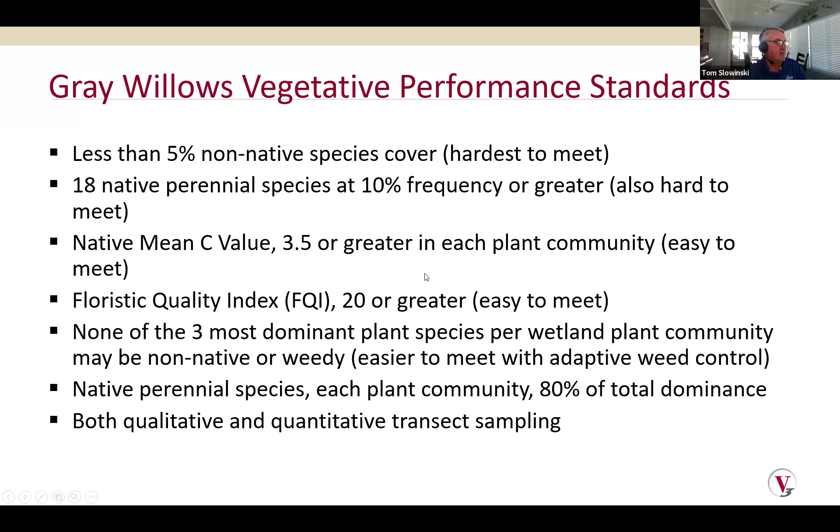And we determine this through both qualitative and quantitative transect sampling. I'm going to skip that because a lot of people know about that in the Chicago area.

And I gave this presentation, a previous version, at the National Mitigation Banking Conference in Jacksonville, Florida last year. This was a little unique to some of those folks.

So keys to success: pre-seeding weed control, adaptive modified planting plan based on as-built grading and hydrology. And one of the benefits of a design build manages approach that it gives us the flexibility to change what we're doing from both an economic and resource perspective,

including modified plant mixes based on post-planting weed and invasive species management. And that was a factor in the north part of the project.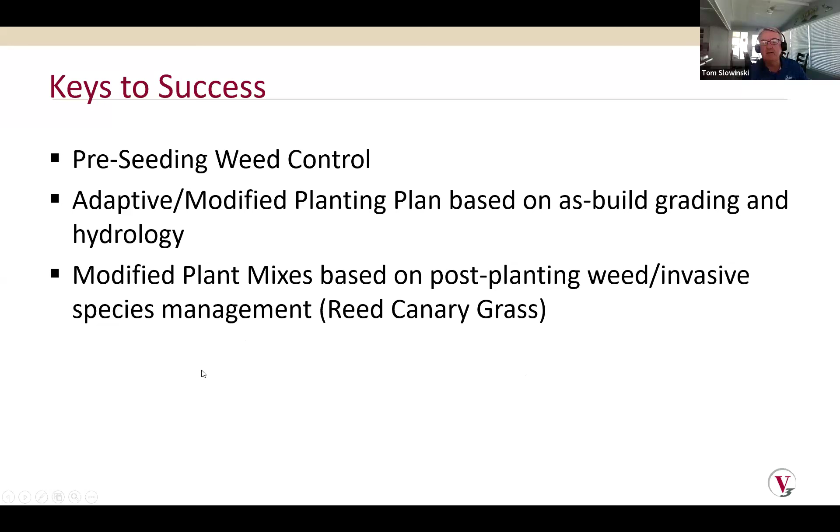So why we do pre-seeding weed control? We do it 1 or 2 full growing seasons prior to native seed installation and plant. It achieves effective control of the most persistent and aggressive weeds, especially when you're dealing with reed canary grass, cattails, or Phragmites.

It reduces competition and prepares a clean slate for native species to grow and expand. It reduces the long-term use of herbicides due to quicker native species establishment. It minimizes native species side kill resulting from less herbicide use. And it accelerates native species establishment, so project goals and performance standards can be achieved earlier.

And I have photos showing how this works in the 3 areas. So this is the southern area along Fearston Creek. This was the turf field in 2017, which was proposed as a wetland creation area.

Prior to construction, 2 herbicide pre-seeding weed control applications were conducted during 2018 to kill the existing Kentucky bluegrass and other lawn weeds.

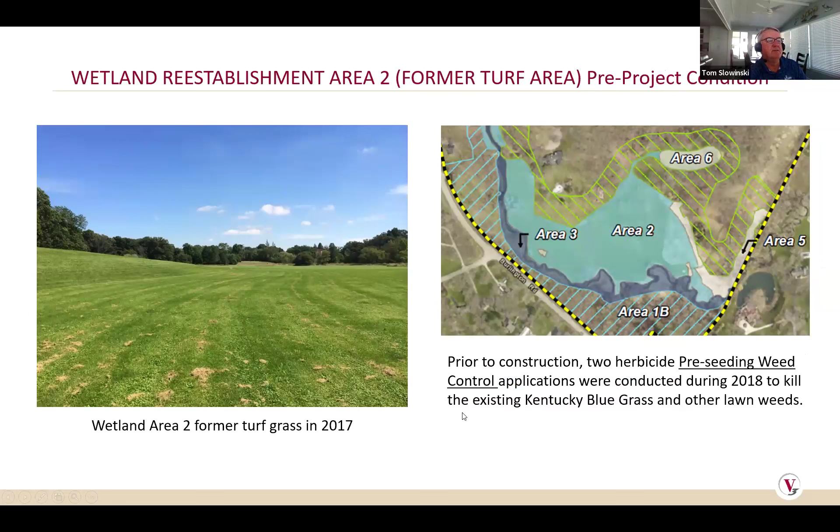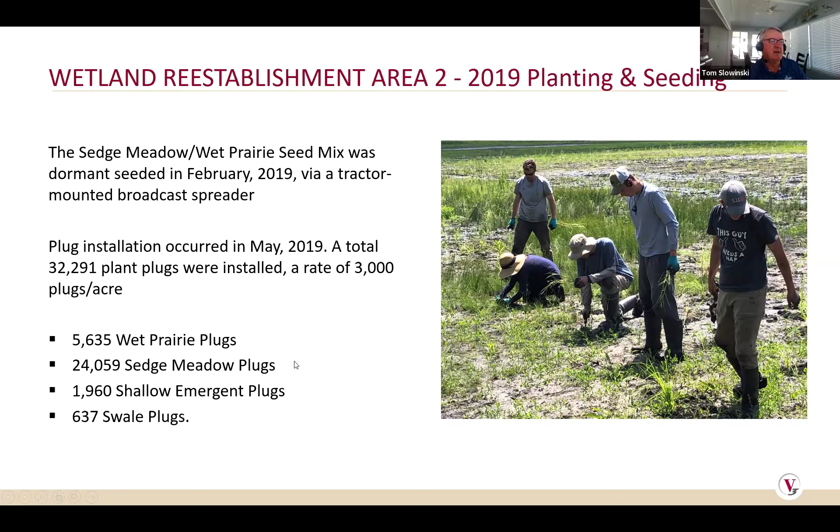So this is some of the planting in 2019. It was a sedge meadow wet prairie seed mix that was installed, and then we used various types of wetland plant plugs throughout the area, based on the existing grading and conditions. These are some of our summer interns, although now we call them seasonal field technicians, and we are hiring for 2024. More on that later.

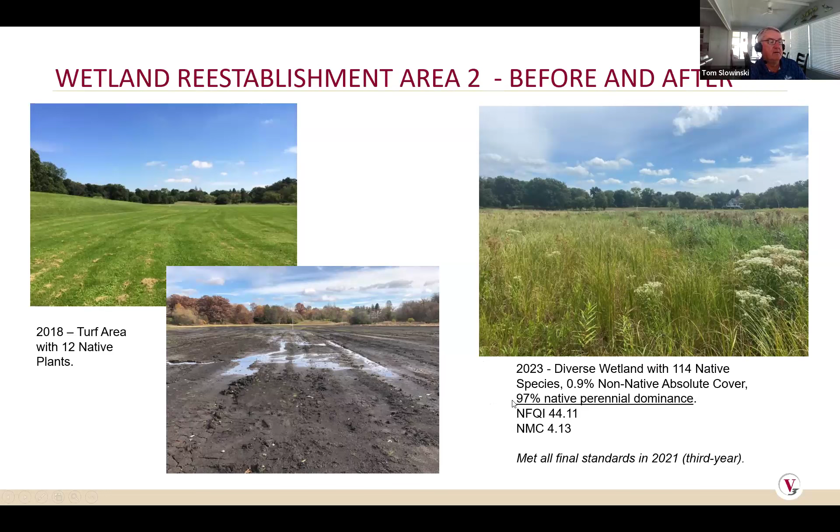So this is a before and after summary of our data. Our native floristic quality index was 44. This was in 2021, considered a very high quality native plant community with a native mean C of 4.13. The standard is 3.5, so this well exceeded the performance standards.

Onto our middle area, area 7. The photo on the left is from our 2015 wetland delineation. It was a cornfield then. We had one farmed wetland in the center, and this was our proposed wetland creation area.

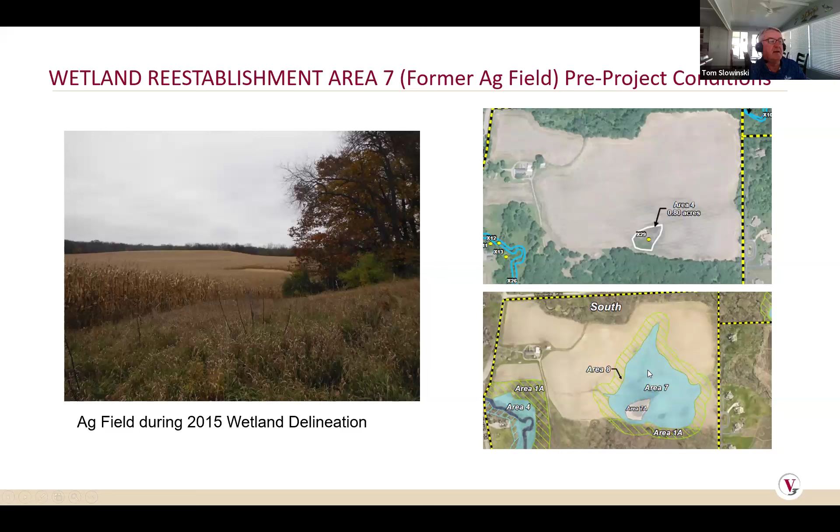Here again is our engineering grading plan. We did some perimeter grading around that to squeeze out a few more credits, which is an important consideration to pay for all the work you need to do. One thing I didn't mention, the nice oak woods was on the southern perimeter of the area. You can kind of see it here on the left.

So this is after grading and tile removal. It actually, in 2019, was a little wetter than we thought, which is not a bad thing, actually.

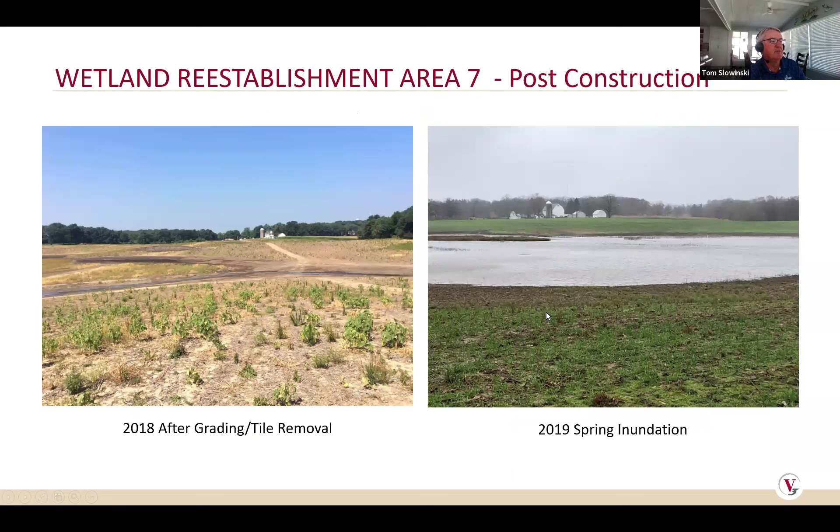Which led to our adaptive planting plan, because in the approved MBI we proposed two plug mixes, based on how we thought the hydrology conditions would support, in addition to a 100-foot buffer prairie planting. But we figured out what George figured out we needed to do. Based on the hydrology, we needed to refine our planting plan based on as-built hydrologic conditions, kind of a micro planting effort.

So basically, George waded through this whole thing and flagged out different plant communities, and on the right is our adaptive planting plan, where we went from two plant mixes to five, including wet prairie, sedge meadow, shallow emergent, deep emergent, and aquatic.

We purchased most of our emergent plants from Spence Nursery in Muncie, Indiana, and they were very flexible because we needed to change our plant mixes in a short order.

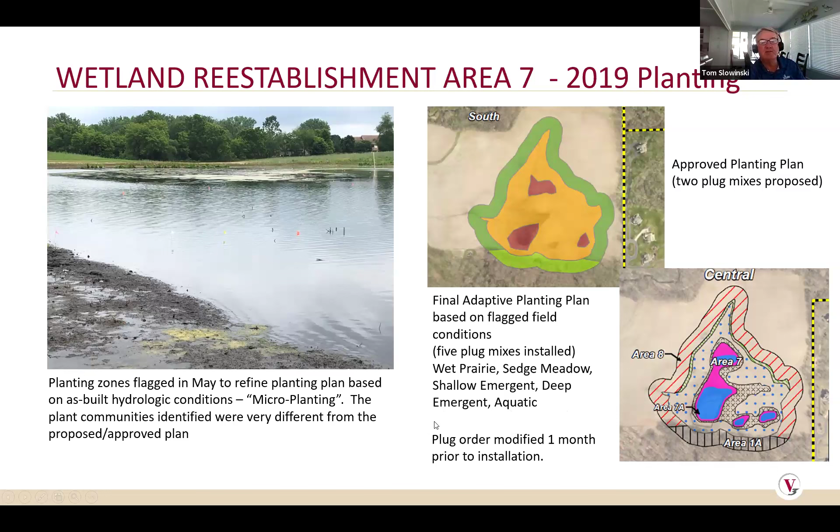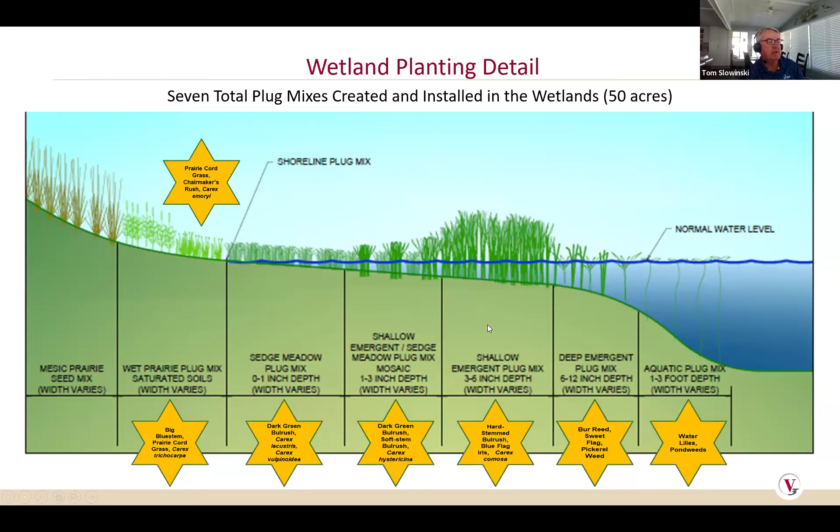This is a schematic of the planting, a standard water level plant community mix by elevation. Starting with mesic prairie on the slope, wet prairie plugs on the edge with saturated soils, sedge meadow plug mix where there's shallow depth water of 0 to 1 inch, shallow emergent sedge meadows at 1 to 3 inch depth, shallow emergent plugs at 3 to 6 inches, and then deep emergent and aquatics.

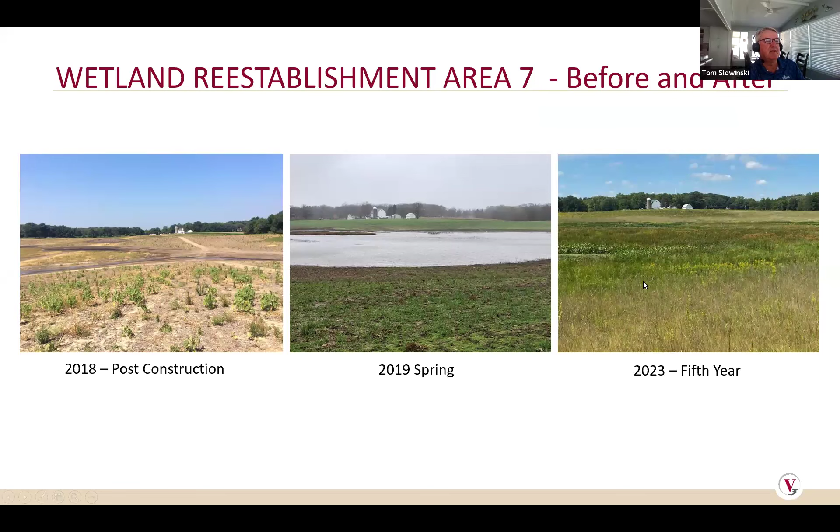And this is a much better photo. So it went from 2018 to 2023. This is one of the areas.

V3 is responsible for a 100-foot prairie buffer around the perimeter. Campton is also doing prairie on the remaining parts of the farm field, including a part of a grant from the Conservation Foundation. We work with them on the management of the entire property. We coordinate with burns, we coordinate with weed control, and we help them when they have technical questions on restoration.

One of the issues in the upland buffers that they're dealing with is it was infested with chervil, which is a very bad weed, but we've gotten through the management of all our areas quite successfully.

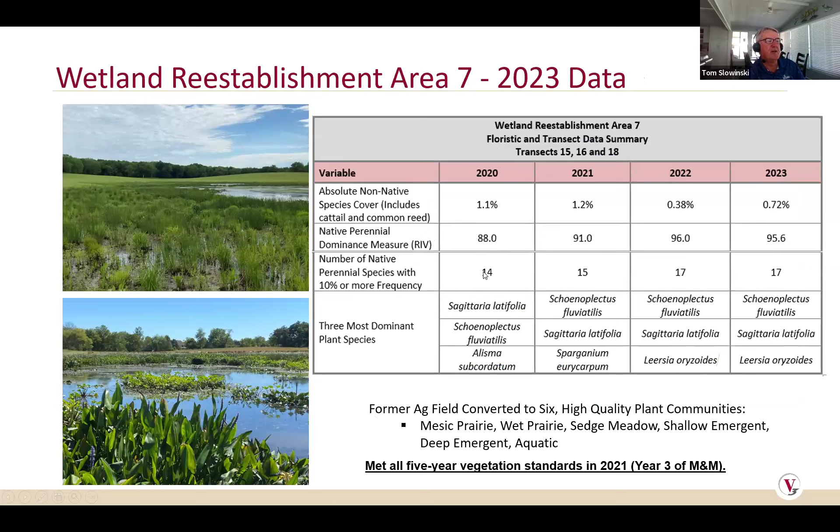This is just some of the data. I won't go into this very much, but absolute non-native species cover is very low, native perennial dominance is very high, and the number of native perennial species with 10% or more frequency, you see we met that standard. I don't see the FQI here, but that was also pretty high.

And then on to area 11. So this one was a challenge. It was basically a monoculture of reed canary grass, but we needed to figure out how to meet the wetland enhancement performance standards. We've had some success dealing with reed canary grass in the past on a much smaller scale, but it's a very aggressive non-native perennial species, a prolific seed producer that spreads through extensive rhizome production.

So we did pre-seeding weed control with this too, pre-planting weed control, 2 boom spraying events in 2018, and another in spring 2019, 2 weeks prior to planting. Killing the reed canary grass via herbicide was necessary for the restoration to work. There was actually a small patch of lake sedge in the middle of this - hard to explain, but we definitely preserved that.

Plug installation began in mid-May of 2019. An important factor: due to the likely resurgence of reed canary grass from the seed bank, grass species were omitted from the seed and plug mixes so we could use a grass-specific herbicide to continually manage the reed canary grass. So the seed and plug mixes were composed entirely of sedges and forbs. After 1 month, we started to get good plant growth and some good hydrology.

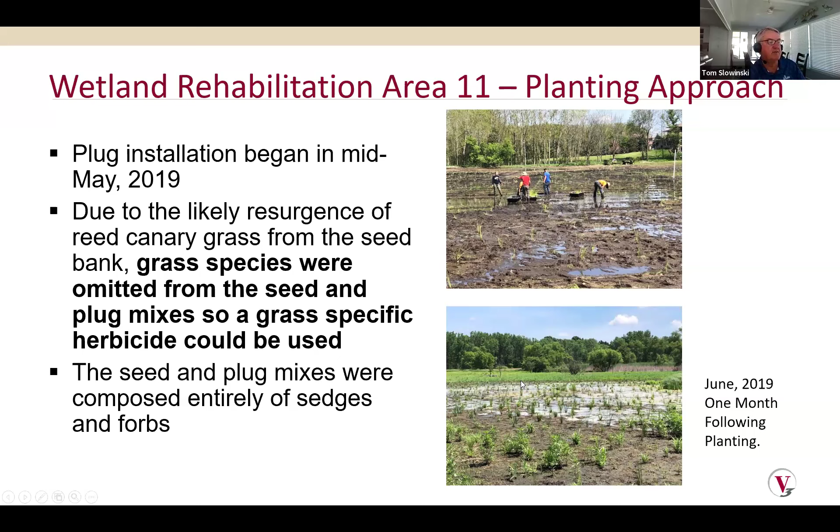So some of the data on area 11. The FQI pre-management - one thing we were required to do as part of the mitigation banking review and approval - we collected good floristic quality data in the existing wetlands so we could monitor what the agencies call lift, or increase in function due to the restoration, and US EPA was kind of the impetus behind that. You can see we had our native FQI of 2, 5 native species, relative native cover of 5.4%. After 6 years of management, the native FQI was 36.5, with 85 perennial species and a relative cover of 98%.

With the dominant plants, I don't know what these are other than the carex, Joe Pye weed, and... forget that one. So anyway, here's our cover for all our areas, some of our FQA data.

You can see the native FQI here - the standard is 20, and we far exceeded that in all of our wetland creation reestablishment areas. We exceeded the native mean C of 3.5 in all, and had extensive numbers of native plants. Some of the harder standards to meet - the absolute cover of non-native species - were all below 5%, and the native perennial relative importance values were all over 90.

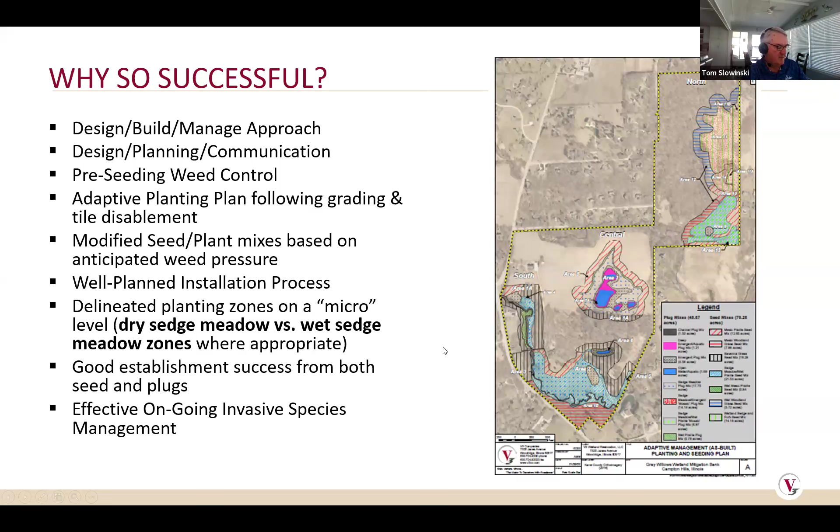So summary on the right is our as-built, not only wetland delineation, but mitigation plan. This was approved as part of our final credit release. We did have a couple buffer areas that did not meet standards, but it wasn't worth the effort to continue with those. So we did a final 2023 growing season wetland delineation. We had a timely 5th year growing season monitoring.

Ongoing weed control is key, and our field ecologists and summer technicians spent 2,500 hours in 2023. The reason is that for the hard to meet standards, you don't want any surprises showing up during your final monitoring. We scheduled the IRT sign-off meeting, and the IRT is the Corps, US EPA, US Fish and Wildlife Service. They confirmed our delineation, or verified our delineation, and we provided them data they could review prior to the sign-off meeting. And they really like this site, as do we.

It's been a very successful mitigation project. And after our sign-off meeting, they confirmed that the final credits would be released. So on November 1st, the IRT and the Corps released our final 18.86 credits, which is very important in the marketplace for mitigation, for people that need mitigation bank credits. We actually had a half credit more than our initial design. And we submitted our final monitoring report just for the record in December.